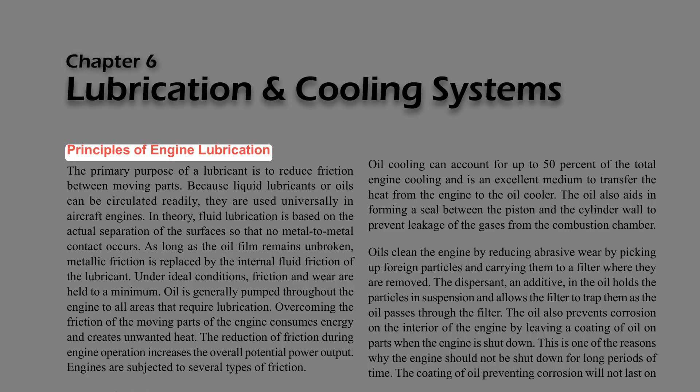Principles of engine lubrication. The primary purpose of a lubricant is to reduce friction between moving parts. Because liquid lubricants or oils can be circulated readily, they are used universally in aircraft engines. In theory, fluid lubrication is based on the actual separation of the surfaces so that no metal-to-metal contact occurs. As long as the oil film remains unbroken, metallic friction is replaced by the internal fluid friction of the lubricant. Under ideal conditions, friction and wear are held to a minimum.

Oil is generally pumped throughout the engine to all areas that require lubrication. Overcoming the friction of the moving parts of the engine consumes energy and creates unwanted heat. The reduction of friction during engine operation increases the overall potential power output. Engines are subjected to several types of friction.

Types of friction. Friction may be defined as the rubbing of one object or surface against another. One surface sliding over another surface causes sliding friction, as found in the use of plain bearings. The surfaces are not completely flat or smooth and have microscopic defects that cause friction between the two moving surfaces.

Rolling friction is created when a roller or sphere rolls over another surface, such as with ball or roller bearings, also referred to as anti-friction bearings. The amount of friction created by rolling friction is less than that created by sliding friction, and this bearing uses an outer race and an inner race with balls, or steel spheres, rolling between the moving parts or races.

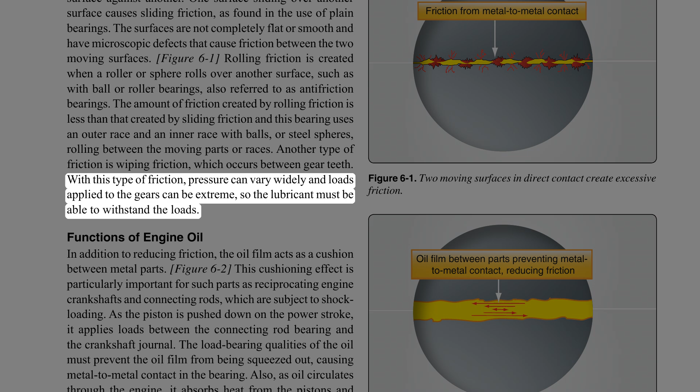Another type of friction is wiping friction, which occurs between gear teeth. With this type of friction, pressure can vary widely and loads applied to the gears can be extreme, so the lubricant must be able to withstand the loads.

Functions of engine oil. In addition to reducing friction, the oil film acts as a cushion between metal parts. This cushioning effect is particularly important for such parts as reciprocating engine crankshafts and connecting rods, which are subject to shock loading. As the piston is pushed down on the power stroke, it applies loads between the connecting rod bearing and the crankshaft journal. The load-bearing qualities of the oil must prevent the oil film from being squeezed out, causing metal-to-metal contact in the bearing.

Also, as oil circulates through the engine, it absorbs heat from the pistons and cylinder walls. In reciprocating engines, these components are especially dependent on the oil for cooling. Oil cooling can account for up to 50% of the total engine cooling and is an excellent medium to transfer the heat from the engine to the oil cooler.

The oil also aids in forming a seal between the piston and the cylinder wall to prevent leakage of the gases from the combustion chamber.

Oils clean the engine by reducing abrasive wear, picking up foreign particles and carrying them to a filter where they are removed. The dispersant, an additive in the oil, holds the particles in suspension and allows the filter to trap them as the oil passes through the filter.

The oil also prevents corrosion on the interior of the engine by leaving a coating of oil on parts when the engine is shut down. This is one of the reasons why the engine should not be shut down for long periods of time. The coating of oil preventing corrosion will not last on the parts, allowing them to rust or corrode. The engine's oil is the lifeblood of the engine, and it is very important for the engine to perform its function and to extend the length between overhauls.

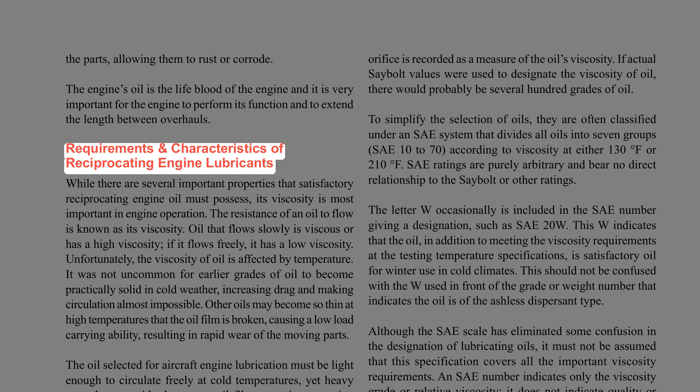Requirements and characteristics of reciprocating engine lubricants. While there are several important properties that satisfactory reciprocating engine oil must possess, its viscosity is most important in engine operation. The resistance of an oil to flow is known as its viscosity.

Oil that flows slowly is viscous or has a high viscosity. If it flows freely, it has a low viscosity. Unfortunately, the viscosity of oil is affected by temperature. It was not uncommon for earlier grades of oil to become practically solid in cold weather, increasing drag and making circulation almost impossible. Other oils may become so thin at high temperatures that the oil film is broken, causing a low load carrying ability, resulting in rapid wear of the moving parts.

The oil selected for aircraft engine lubrication must be light enough to circulate freely at cold temperatures, yet heavy enough to provide the proper oil film at engine operating temperatures. Since lubricants vary in properties and since no one oil is satisfactory for all engines and all operating conditions, it is extremely important that only the approved grade or Society of Automotive Engineers, SAE, rating be used.

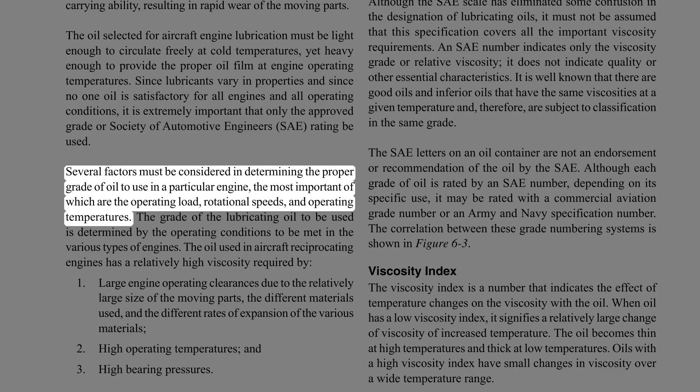Several factors must be considered in determining the proper grade of oil to use in a particular engine, the most important of which are the operating load, rotational speeds, and operating temperatures. The grade of lubricating oil is determined by the operating conditions to be met in various types of engines. The oil used in aircraft reciprocating engines has a relatively high viscosity required by large engine operating clearances, due to the relatively large size of the moving parts, the different materials used, and the different rates of expansion of the various materials.

High operating temperatures and high bearing pressures.

Viscosity. Generally, commercial aviation oils are classified by a number, such as 80, 100, 140, etc. That is an approximation of the viscosity as measured by a testing instrument called the Saybolt Universal Viscosimeter. In this instrument, a tube holds a specific quantity of the oil to be tested. The oil is brought to an exact temperature by a liquid bath surrounding the tube. The time in seconds required for exactly 60 cubic centimeters of oil to flow through an accurately calibrated orifice is recorded as a measure of the oil's viscosity.

If actual Saybolt values were used to designate the viscosity of oil, there would probably be several hundred grades of oil. To simplify the selection of oils, they are often classified under an SAE system that divides all oils into 7 groups, SAE 10 to 70, according to viscosity at either 130 degrees Fahrenheit or 210 degrees Fahrenheit. SAE ratings are purely arbitrary and bear no direct relationship to the Saybolt or other ratings.

The letter W occasionally is included in the SAE number, giving a designation such as SAE 20W. This W indicates that the oil, in addition to meeting the viscosity requirements at the testing temperature specifications, is satisfactory for winter use in cold climates. This should not be confused with the W used in front of the grade or weight number, which indicates the oil is of the ashless dispersant type.

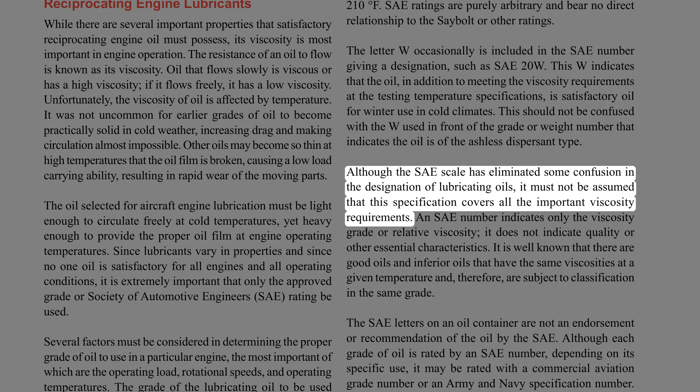Although the SAE scale has eliminated some confusion in the designation of lubricating oils, it must not be assumed that this specification covers all the important viscosity requirements. An SAE number indicates only the viscosity grade or relative viscosity; it does not indicate quality or other essential characteristics. It is well known that there are good oils and inferior oils that have the same viscosities at a given temperature, and therefore are subject to classification in the same grade.

The SAE letters on an oil container are not an endorsement or recommendation of the oil by the SAE. Although each grade of oil is rated by an SAE number, depending on its specific use, it may also be rated with a commercial aviation grade number or an Army and Navy specification number. The correlation between these grade numbering systems is shown in Figure 6-3.

Viscosity Index. The viscosity index is a number that indicates the effect of temperature changes on the viscosity of the oil. When oil has a low viscosity index, it signifies a relatively large change of viscosity with increased temperature. The oil becomes thin at high temperatures and thick at low temperatures. Oils with a high viscosity index have small changes in viscosity over a wide temperature range. The best oil for most purposes is one that maintains a constant viscosity throughout temperature changes.

Oil having a high viscosity index resists excessive thickening when the engine is subjected to cold temperatures. This allows for rapid cranking speeds during starting and prompt oil circulation during initial startup. This oil also resists excessive thinning when the engine is at operating temperature, providing full lubrication and bearing load protection.

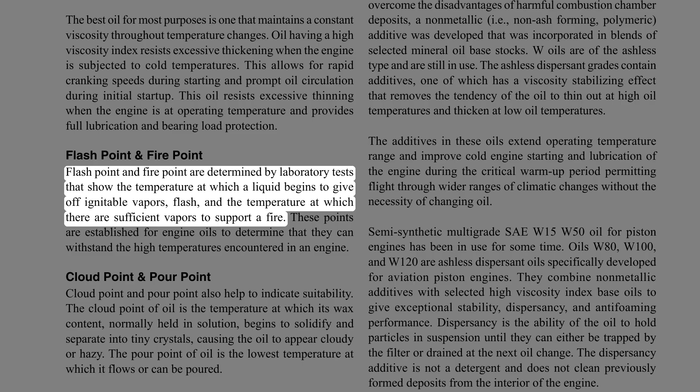Flash point and fire point. Flash point and fire point are determined by laboratory tests that show the temperature at which a liquid begins to give off ignitable vapors, flash, and the temperature at which there are sufficient vapors to support a fire. These points are established for engine oils to determine that they can withstand the high temperatures encountered in an engine.

Cloud point and pour point. Cloud point and pour point also help to indicate suitability. The cloud point of oil is the temperature at which its wax content, normally held in solution, begins to solidify and separate into tiny crystals, causing the oil to appear cloudy or hazy. The pour point of oil is the lowest temperature at which it flows or can be poured.

Specific gravity. Specific gravity is a comparison of the weight of the substance to the weight of an equal volume of distilled water at a specified temperature. As an example, water weighs approximately 8 pounds to the gallon.

Oil with a specific gravity of 0.9 would weigh 7.2 pounds to the gallon.

In the early years, the performance of aircraft piston engines was such that they could be lubricated satisfactorily by means of straight mineral oils, blended from specially selected petroleum-based stocks. Oil grades 65, 80, 100, and 120 are straight mineral oils blended from selected high viscosity index base oils.

These oils do not contain any additives except for very small amounts of pour point depressant, which helps improve fluidity at very low temperatures, and an antioxidant. This type of oil is used during the break-in period of a new aviation piston engine or those recently overhauled.

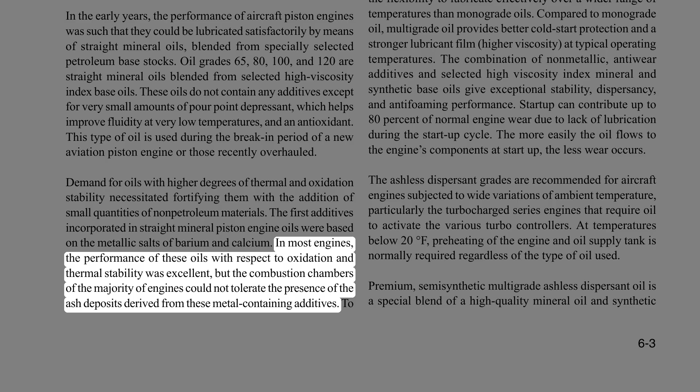Demand for oils with higher degrees of thermal and oxidation stability necessitated fortifying them with the addition of small quantities of non-petroleum materials. The first additives incorporated in straight mineral piston engine oils were based on the metallic salts of barium and calcium. In most engines, the performance of these oils with respect to oxidation and thermal stability was excellent, but the combustion chambers of the majority of engines could not tolerate the presence of the ash deposits derived from these metal-containing additives.

To overcome the disadvantages of harmful combustion chamber deposits, a non-metallic, i.e., non-ash-forming, polymeric additive was developed that was incorporated in blends of selected mineral oil-based stocks. W oils are of the ashless type and are still in use.

The ashless dispersant grades contain additives, one of which has a viscosity stabilizing effect that removes the tendency of the oil to thin out at high oil temperatures and thicken at low oil temperatures. The additives in these oils extend operating temperature range and improve cold engine starting and lubrication of the engine during the critical warm-up period, permitting flight through wider ranges of climatic changes without the necessity of changing oil.

Semi-synthetic multigrade, SAE W15 W50, oil for piston engines has been in use for some time. Oils W80, W100, and W120 are ashless dispersant oils specifically developed for aviation piston engines. They combine non-metallic additives with selected high viscosity index base oils to give exceptional stability, dispersancy, and anti-foaming performance.

Dispersancy is the ability of the oil to hold particles in suspension until they can either be trapped by the filter or drained at the next oil change. The dispersancy additive is not a detergent and does not clean previously formed deposits from the interior of the engine.

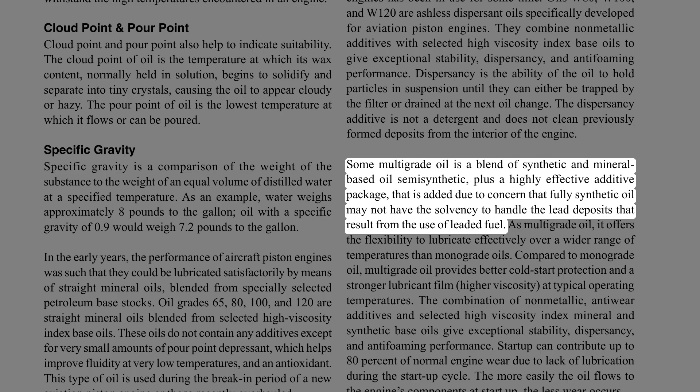Some multigrade oil is a blend of synthetic and mineral-based oil, semi-synthetic, plus a highly effective additive package, that is added due to concern that fully synthetic oil may not have the solvency to handle the lead deposits that result from the use of leaded fuel.

As a multigrade oil, it offers the flexibility to lubricate effectively over a wider range of temperatures than monograde oils. Compared to monograde oil, multigrade oil provides better cold start protection and a stronger lubricant film, higher viscosity, at typical operating temperatures. The combination of non-metallic anti-wear additives and selected high viscosity index mineral and synthetic base oils give exceptional stability, dispersancy, and anti-foaming performance.

Startup can contribute up to 80% of normal engine wear due to lack of lubrication during the startup cycle. The more easily the oil flows to the engine's components at startup, the less wear occurs.

The ashless dispersant grades are recommended for aircraft engines subjected to wide variations of ambient temperature, particularly the turbocharged series engines that require oil to activate the various turbocontrollers. At temperatures below 20 degrees Fahrenheit, preheating of the engine and oil supply tank is normally required regardless of the type of oil used.

Premium, semi-synthetic multigrade ashless dispersant oil is a special blend of a high-quality mineral oil and synthetic hydrocarbons with an advanced additive package that has been specifically formulated for multigrade applications. The ashless anti-wear additive provides exceptional wear protection for wearing surfaces.

Many aircraft manufacturers add approved preservative lubricating oil to protect new engines from rust and corrosion at the time the aircraft leaves the factory. This preservative oil should be removed at the end of the first 25 hours of operation.

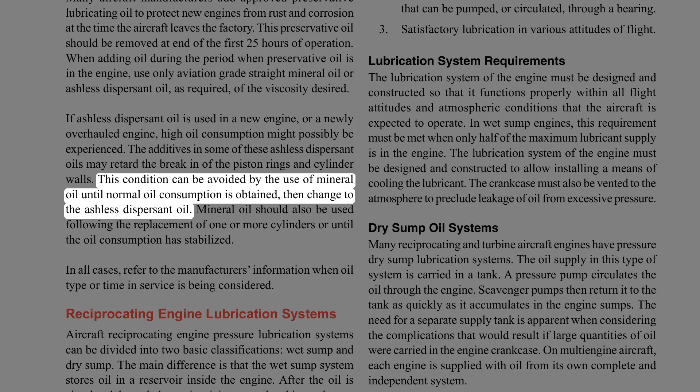Mineral oil should also be used following the replacement of one or more cylinders, or until oil consumption has stabilized. In all cases, refer to the manufacturer's information when oil type or time in service is being considered.

Reciprocating engine lubrication systems can be divided into two basic classifications: Wet-Sump and Dry-Sump. The main difference is that the Wet-Sump system stores oil in a reservoir inside the engine. After the oil is circulated through the engine, it is returned to this crankcase-based reservoir. A Dry-Sump engine pumps the oil from the engine's crankcase to an external tank that stores the oil, using a scavenge pump, some external tubing, and an external tank. Other than this difference, the systems use similar types of components. Because the Dry-Sump system contains all the components of the Wet-Sump system, it is explained as an example.

Combination splash and pressure lubrication. The lubricating oil is distributed to the various moving parts of a typical internal combustion engine by one of three methods: pressure, splash, or a combination of pressure and splash. The pressure lubrication system is the principal method of lubricating aircraft engines. Splash lubrication may be used in addition to pressure lubrication, but it is never used by itself. Aircraft engine lubrication systems are always either the pressure type or the combination pressure and splash type, usually the latter.

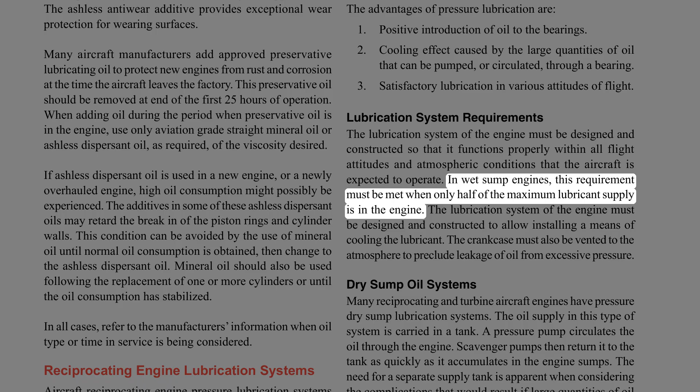Lubrication system requirements: the lubrication system of the engine must be designed and constructed so that it functions properly within all flight attitudes and atmospheric conditions the aircraft is expected to operate in. In Wet-Sump engines, this requirement must be met when only half of the maximum lubricant supply is in the engine. The lubrication system must also allow installing a means of cooling the lubricant, and the crankcase must be vented to the atmosphere to preclude leakage of oil from excessive pressure.

Dry-Sump Oil Systems. Many reciprocating and turbine aircraft engines have pressure dry-sump lubrication systems. The oil supply in this type of system is carried in a tank. A pressure pump circulates the oil through the engine, and scavenger pumps return it to the tank as quickly as it accumulates in the engine sumps. The need for a separate supply tank is apparent when considering the complications that would result if large quantities of oil were carried in the engine crankcase.

On multi-engine aircraft, each engine is supplied with oil from its own complete and independent system. Although the arrangement of oil systems in different aircraft varies widely, and the units differ in construction details, the functions of all such systems are the same. A study of one system clarifies the general operation and maintenance requirements of other systems.

The principal units in a typical reciprocating engine dry-sump oil system include an oil supply tank, an engine-driven pressure oil pump, a scavenge pump, an oil cooler with an oil cooler control valve, oil tank vent, necessary tubing, and pressure and temperature indicators.

Oil tanks. Oil tanks are generally associated with a dry-sump lubrication system, while a wet-sump system uses the crankcase of the engine to store the oil. Oil tanks are usually constructed of aluminum alloy and must withstand any vibration, inertia, and fluid loads expected in operation. Each oil tank used with a reciprocating engine must have expansion space of not less than the greater of 10% of the tank capacity or 0.5 gallons. Each filler cap of an oil tank used with an engine must provide an oil-tight seal.

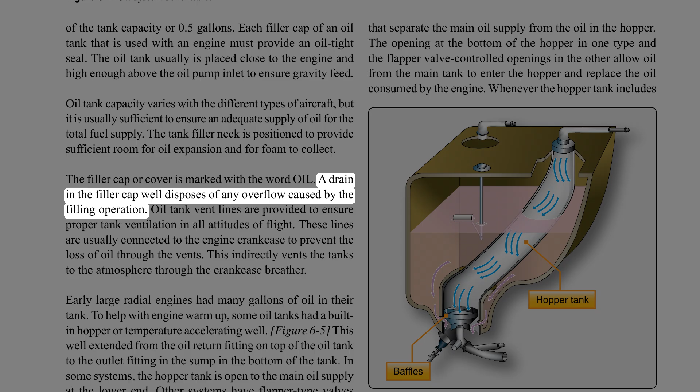The oil tank is usually placed close to the engine and high enough above the oil pump inlet to ensure gravity feed. Oil tank capacity varies with different types of aircraft, but is usually sufficient to ensure an adequate supply of oil for the total fuel supply. The tank filler neck is positioned to provide sufficient room for oil expansion and for foam to collect. The filler cap or cover is marked with the word oil. A drain in the filler cap well disposes of any overflow caused by the filling operation.

Oil tank vent lines are provided to ensure proper tank ventilation in all attitudes of flight. These lines are usually connected to the engine crankcase to prevent the loss of oil through the vents. This indirectly vents the tanks to the atmosphere through the crankcase breather.

Early large radial engines had many gallons of oil in their tank. To help with engine warm-up, some oil tanks had a built-in hopper or temperature accelerating well. This well extended from the oil return fitting on top of the oil tank to the outlet fitting in the sump in the bottom of the tank.

In some systems, the hopper tank is open to the main oil supply at the lower end. Other systems have flapper-type valves that separate the main oil supply from the oil in the hopper. The opening at the bottom of the hopper in one type, and the flapper valve-controlled openings in the other, allow oil from the main tank to enter the hopper and replace the oil consumed by the engine. Whenever the hopper tank includes the flapper-controlled openings, the valves are operated by differential oil pressure.

By separating the circulating oil from the surrounding oil in the tank, less oil is circulated. This hastens the warming of the oil when the engine was started. Very few of these types of tanks are still in use, and most are associated with radial engine installations.

Generally, the return line in the top of the tank is positioned to discharge the returned oil against the wall of the tank in a swirling motion. This method considerably reduces foaming that occurs when oil mixes with air. Baffles in the bottom of the oil tank break up this swirling action to prevent air from being drawn into the inlet line of the oil pressure pump. Foaming oil increases in volume and reduces its ability to provide proper lubrication.

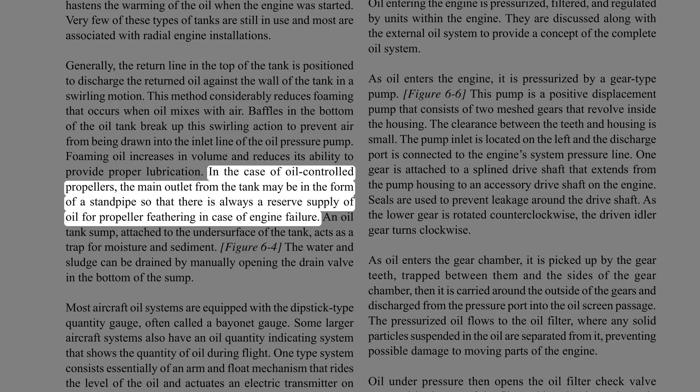In the case of oil-controlled propellers, the main outlet from the tank may be in the form of a standpipe, so that there is always a reserve supply of oil for propeller feathering in case of engine failure.

An oil tank sump, attached to the undersurface of the tank, acts as a trap for moisture and sediment. The water and sludge can be drained by manually opening the drain valve in the bottom of the sump.

Most aircraft oil systems are equipped with the dipstick-type quantity gauge, often called a bayonet gauge. Some larger aircraft systems also have an oil quantity indicating system that shows the quantity of oil during flight. One type of system consists essentially of an arm and float mechanism that rides the level of the oil and actuates an electric transmitter on top of the tank. The transmitter is connected to a flight deck gauge that indicates the quantity of oil.

Oil pump. Oil entering the engine is pressurized, filtered, and regulated by units within the engine. They are discussed along with the external oil system to provide a concept of the complete oil system.

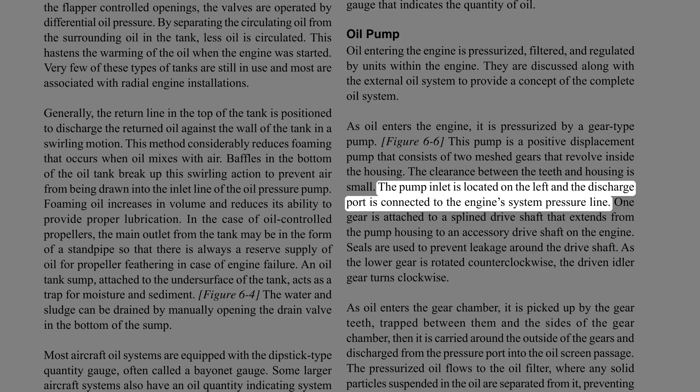As oil enters the engine, it is pressurized by a gear-type pump. This pump is a positive displacement pump that consists of two meshed gears that revolve inside the housing. The clearance between the teeth and housing is small. The pump inlet is located on the left, and the discharge port is connected to the engine's system pressure line. One gear is attached to a splined drive shaft that extends from the pump housing to an accessory drive shaft on the engine. Seals are used to prevent leakage around the drive shaft.

As the lower gear is rotated counterclockwise, the driven idler gear turns clockwise. As oil enters the gear chamber, it is picked up by the gear teeth, trapped between them and the sides of the gear chamber. Then it is carried around the outside of the gears and discharged from the pressure port into the oil screen passage.

The pressurized oil flows to the oil filter, where any solid particles suspended in the oil are separated from it, preventing possible damage to moving parts of the engine.

Oil under pressure then opens the oil filter check valve mounted in the top of the filter. This valve is used mostly with dry-sump radial engines and is closed by a light spring loading of 1 to 3 pounds per square inch, psi, when the engine is not operating, to prevent gravity-fed oil from entering the engine and settling in the lower cylinders or sump area of the engine.

If oil were allowed to gradually seep by the rings of the piston and fill the combustion chamber, it could cause a liquid lock. This could happen if the valves on the cylinder were both closed and the engine was cranked for start. Damage could occur to the engine.

The oil filter bypass valve, located between the pressure side of the oil pump and the oil filter, permits unfiltered oil to bypass the filter and enter the engine if the oil filter is clogged, or during cold weather if congealed oil is blocking the filter during engine start.

The spring loading on the bypass valve allows the valve to open before the oil pressure collapses the filter. In the case of cold, congealed oil, it provides a low resistance path around the filter. Dirty oil in an engine is better than no lubrication.

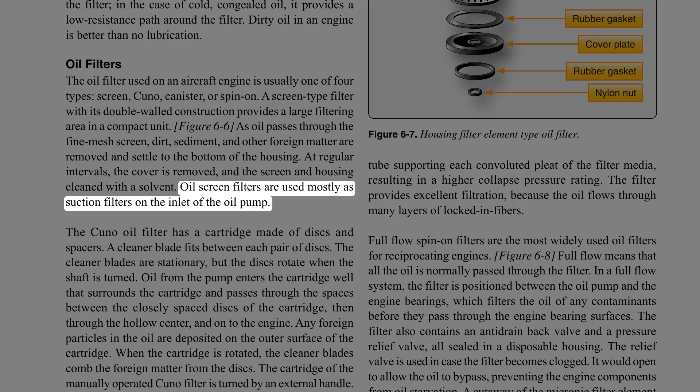The Cuno oil filter has a cartridge made of discs and spacers. A cleaner blade fits between each pair of discs. The cleaner blades are stationary, but the discs rotate when the shaft is turned. Oil from the pump enters the cartridge well that surrounds the cartridge and passes through the spaces between the closely spaced discs, then through the hollow center, and onto the engine. Any foreign particles in the oil are deposited on the outer surface of the cartridge. When the cartridge is rotated, the cleaner blades comb the foreign matter from the discs.

The cartridge of the manually operated Cuno filter is turned by an external handle. Automatic Cuno filters have a hydraulic motor built into the filter head. This motor, operated by engine oil pressure, rotates the cartridge whenever the engine is running. There is a manual turning nut on the automatic Cuno filter for rotating the cartridge manually during inspections. This filter is not often used on modern aircraft.

A canister housing filter has a replaceable filter element; the rest of the components, other than seals and gaskets, are reused. The filter element is designed with a corrugated, strong steel center tube supporting each convoluted pleat of the filter media, resulting in a higher collapse pressure rating. The filter provides excellent filtration because the oil flows through many layers of locked-in fibers.

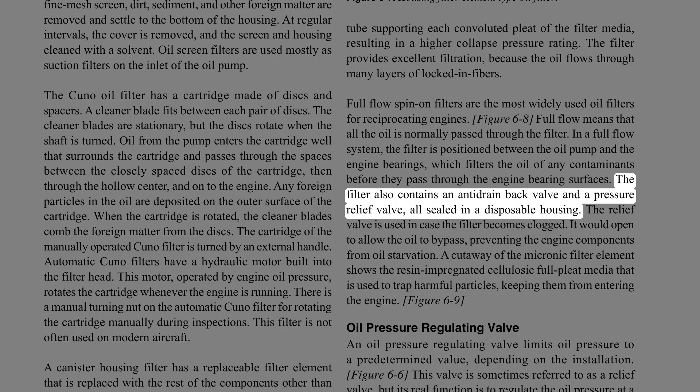Full-flow spin-on filters are the most widely used oil filters for reciprocating engines. Full flow means that all the oil is normally passed through the filter. In a full flow system, the filter is positioned between the oil pump and the engine bearings, which filters the oil of any contaminants before they pass through the engine bearing surfaces. The filter also contains an anti-drain back valve and a pressure relief valve, all sealed in a disposable housing.

The relief valve is used in case the filter becomes clogged. It would open to allow the oil to bypass, preventing the engine components from oil starvation. A cutaway of the micronic filter element shows the resin-impregnated cellulosic full-pleat media that is used to trap harmful particles, keeping them from entering the engine.

Oil pressure regulating valve: an oil pressure regulating valve limits oil pressure to a predetermined value, depending on the installation. This valve is sometimes referred to as a relief valve, but its real function is to regulate the oil pressure at a preset pressure level. The oil pressure must be sufficiently high to ensure adequate lubrication of the engine and its accessories at high speeds and powers. This pressure helps ensure that the oil film between the crankshaft journal and bearing is maintained.

However, the pressure must not be too high, as leakage and damage to the oil system may result. The oil pressure is generally adjusted by loosening the lock nut and turning the adjusting screw. On most aircraft engines, turning the screw clockwise increases the tension of the spring that holds the relief valve on its seat and increases the oil pressure. Turning the adjusting screw counterclockwise decreases the spring tension and lowers the pressure.

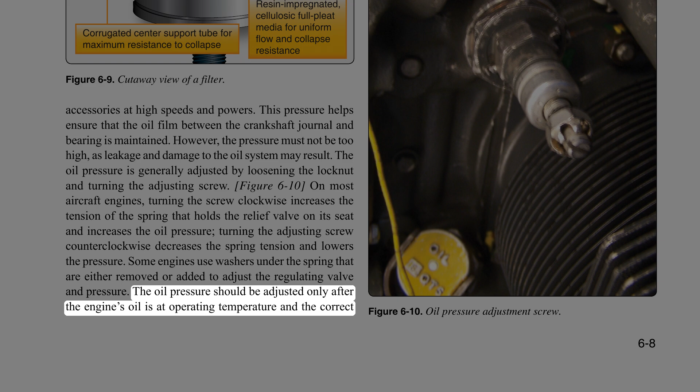Some engines use washers under the spring that are either removed or added to adjust the regulating valve and pressure. The oil pressure should be adjusted only after the engine's oil is at operating temperature and the correct viscosity is verified. The exact procedure for adjusting the oil pressure and the factors that vary in oil pressure setting are included in applicable manufacturer's instructions.

Oil pressure gauge: usually, the oil pressure gauge indicates the pressure that oil enters the engine from the pump. This gauge warns of possible engine failure caused by an exhausted oil supply, failure of the oil pump, burned out bearings, ruptured oil lines, or other causes that may be indicated by a loss of oil pressure.

One type of oil pressure gauge uses a Bourdon tube mechanism that measures the difference between oil pressure and cabin, or atmospheric, pressure. This gauge is constructed similarly to other Bourdon-type gauges, except that it has a small restriction built into the instrument case, or into the nipple connection leading to the Bourdon tube. This restriction prevents the surging action of the oil pump from damaging the gauge or causing the pointer to oscillate too violently with each pressure pulsation.

The oil pressure gauge has a scale ranging from 0 to 200 psi, or from 0 to 300 psi. Operation range markings are placed on the cover glass, or the face of the gauge, to indicate the safe range of oil pressure for a given installation.

A dual-type oil pressure gauge is available for use on multi-engine aircraft. The dual indicator contains two Bourdon tubes, housed in a standard instrument case, one tube being used for each engine. The connections extend from the back of the case to each engine. There is one common movement assembly, but the moving parts function independently.

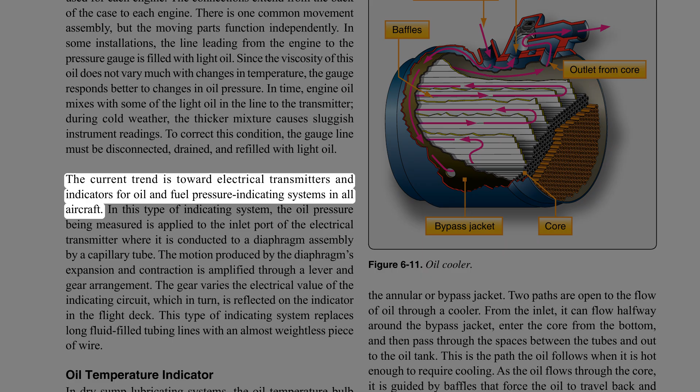The current trend is toward electrical transmitters and indicators for oil and fuel pressure indicating systems in all aircraft. In this type of indicating system, the oil pressure being measured is applied to the inlet port of the electrical transmitter where it is conducted to a diaphragm assembly by a capillary tube. The motion produced by the diaphragm's expansion and contraction is amplified through a lever and gear arrangement. The gear varies the electrical value of the indicating circuit, which in turn is reflected on the indicator in the flight deck. This type of indicating system replaces long fluid-filled tubing lines with an almost weightless piece of wire.

Oil temperature indicator. In dry-sump lubricating systems, the oil temperature bulb may be anywhere in the oil inlet line between the supply tank and the engine. Oil systems for wet-sump engines have the temperature bulb located where it senses oil temperature after the oil passes through the oil cooler. In either system, the bulb is located so that it measures the temperature of the oil before it enters the engine's hot sections.

An oil temperature gauge in the flight deck is connected to the oil temperature bulb by electrical leads. The oil temperature is indicated on the gauge. Any malfunction of the oil cooling system appears as an abnormal reading.

Oil cooler. The cooler, either cylindrical or elliptical shaped, consists of a core enclosed in a double-walled shell. The core is built of copper or aluminum tubes with the tube ends formed to a hexagonal shape and joined together in the honeycomb effect. The ends of the copper tubes of the core are soldered, whereas aluminum tubes are brazed or mechanically joined. The tubes touch only at the ends so that a space exists between them along most of their lengths.

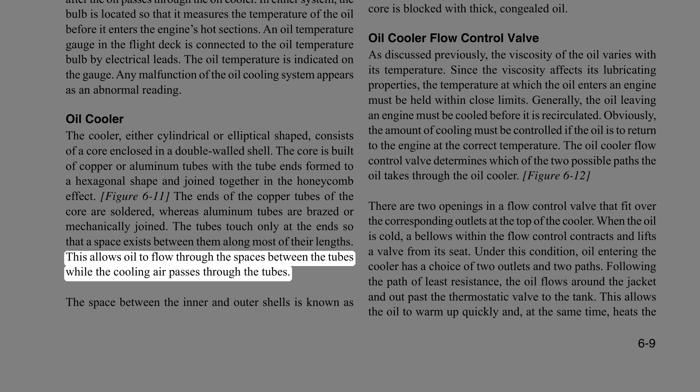This allows oil to flow through the spaces between the tubes while the cooling air passes through the tubes. The space between the inner and outer shells is known as the annular or bypass jacket. Two paths are open to the flow of oil through a cooler. From the inlet, it can flow halfway around the bypass jacket, enter the core from the bottom, and then pass through the spaces between the tubes and out to the oil tank.

This is the path the oil follows when it is hot enough to require cooling. As the oil flows through the core, it is guided by baffles that force the oil to travel back and forth several times before it reaches the core outlet.

The oil can also pass from the inlet completely around the bypass jacket to the outlet without passing through the core. Oil follows this bypass route when the oil is cold or when the core is blocked with thick, congealed oil. Oil cooler flow control valve.

As discussed previously, the viscosity of the oil varies with its temperature. Since the viscosity affects its lubricating properties, the temperature at which the oil enters an engine must be held within close limits. Generally, the oil leaving an engine must be cooled before it is recirculated.

Obviously, the amount of cooling must be controlled if the oil is to return to the engine at the correct temperature. The oil cooler flow control valve determines which of the two possible paths the oil takes through the oil cooler. There are two openings in a flow control valve that fit over the corresponding outlets at the top of the cooler.

When the oil is cold, a bellows within the flow control contracts and lifts a valve from its seat. Under this condition, oil entering the cooler has a choice of two outlets and two paths. Following the path of least resistance, the oil flows around the jacket and out past the thermostatic valve to the tank. This allows the oil to warm up quickly and, at the same time, heats the oil in the core.

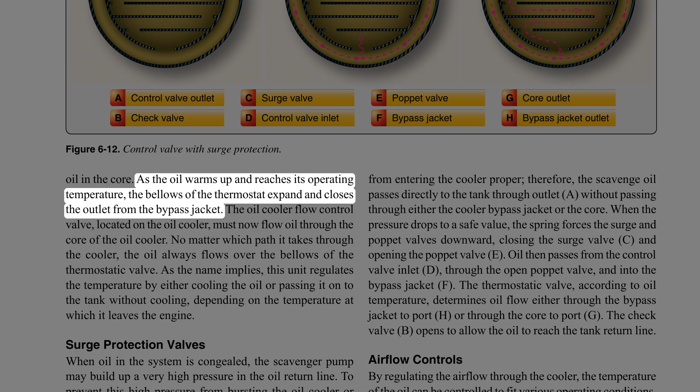As the oil warms up and reaches its operating temperature, the bellows of the thermostat expand and close the outlet from the bypass jacket. The oil cooler flow control valve, located on the oil cooler, must now flow oil through the core of the oil cooler.

No matter which path it takes through the cooler, the oil always flows over the bellows of the thermostatic valve. As the name implies, this unit regulates the temperature by either cooling the oil or passing it onto the tank without cooling, depending on the temperature at which it leaves the engine.

Surge protection valves. When oil in the system is congealed, the scavenge pump may build up a very high pressure in the oil return line. To prevent this high pressure from bursting the oil cooler or blowing off the hose connections, some aircraft have surge protection valves in the engine lubrication systems.

One type of surge valve is incorporated in the oil cooler flow control valve. Another type is a separate unit in the oil return line. The surge protection valve incorporated in a flow control valve is the more common type.

Although this flow control valve differs from the one just described, it is essentially the same except for the surge protection feature. The high-pressure operation condition is shown in Figure 6-12, in which the high oil pressure at the control valve inlet has forced the surge valve, C, upward. Note how this movement has opened the surge valve and, at the same time, seated the poppet valve, E.

The closed poppet valve prevents oil from entering the cooler proper, therefore, the scavenge oil passes directly to the tank through outlet, A, without passing through either the cooler bypass jacket or the core.

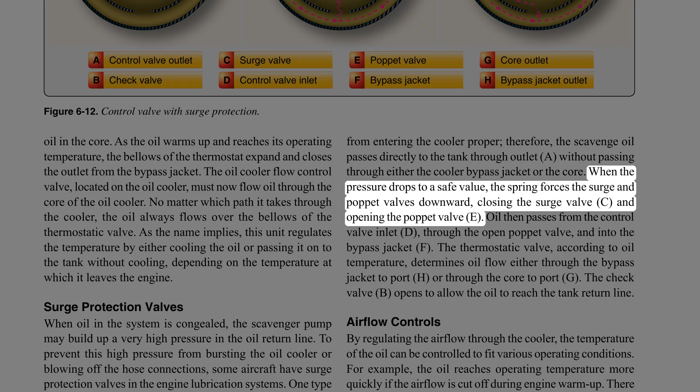When the pressure drops to a safe value, the spring forces the surge and poppet valves downward, closing the surge valve, C, and opening the poppet valve, E. Oil then passes from the control valve inlet, D, through the open poppet valve, and into the bypass jacket, F.

The thermostatic valve, according to oil temperature, determines oil flow either through the bypass jacket to port, H, or through the core to port, G. The check valve, B, opens to allow the oil to reach the tank return line.

Airflow controls. By regulating the airflow through the cooler, the temperature of the oil can be controlled to fit various operating conditions. For example, the oil reaches operating temperature more quickly if the airflow is cut off during engine warm-up.

There are two methods in general use: shutters installed on the rear of the oil cooler, and a flap on the air exit duct. In some cases, the oil cooler air exit flap is opened manually and closed by a linkage attached to a flight deck lever. More often, the flap is opened and closed by an electric motor.

One of the most widely used automatic oil temperature control devices is the floating control thermostat that provides manual and automatic control of the oil inlet temperatures.

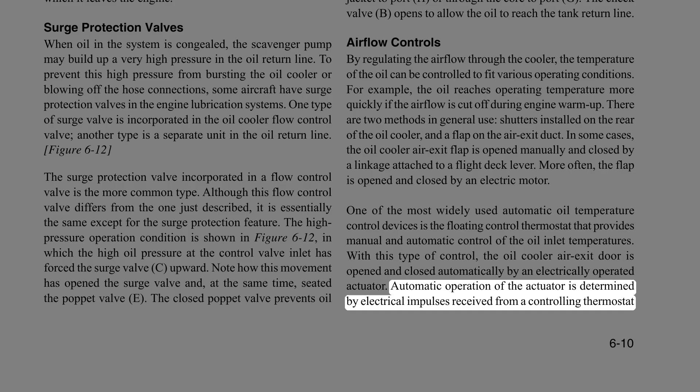With this type of control, the oil cooler air exit door is opened and closed automatically by an electrically operated actuator. Automatic operation of the actuator is determined by electrical impulses received from a controlling thermostat, inserted in the oil pipe leading from the oil cooler to the oil supply tank. The actuator may be operated manually by an oil cooler air exit door control switch.

Placing this switch in the open or closed position produces a corresponding movement of the cooler door. Placing the switch in the auto position puts the actuator under the automatic control of the floating control thermostat.

The thermostat shown in figure 6-13 is adjusted to maintain a normal oil temperature so that it does not vary more than approximately 5 to 8 degrees Celsius, depending on the installation. During operation, the temperature of the engine oil flowing over the bimetal element causes it to wind or unwind slightly.

Figure 6-13b: this movement rotates the shaft, A, and the grounded center contact arm, C. As the grounded contact arm is rotated, it is moved toward either the open or closed floating contact arm, G. The two floating contact arms are oscillated by the cam, F, which is continuously rotated by an electric motor, D, through a gear train, E.

When the grounded center contact arm is positioned by the bimetal element so that it touches one of the floating contact arms, an electric circuit to the oil cooler exit flap actuator motor is completed, causing the actuator to operate and position the oil cooler air exit flap.

Newer systems use electronic control systems, but the function or overall operation is basically the same regarding control of the oil temperature through control of the airflow through the cooler. In some lubrication systems, dual oil coolers are used.

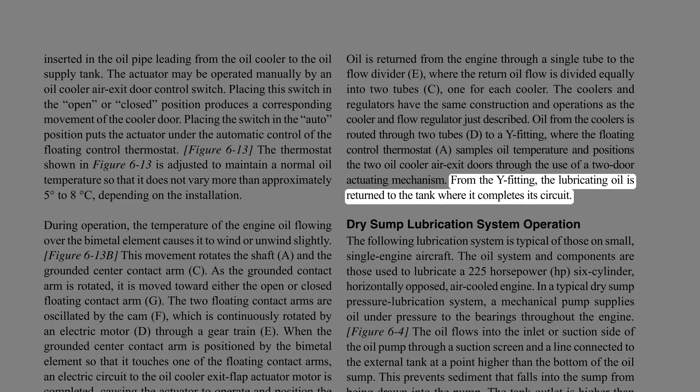Oil from the coolers is routed through two tubes, D, to a Y fitting, where the floating control thermostat, A, samples oil temperature and positions the two oil cooler air exit doors through the use of a two-door actuating mechanism. From the Y fitting, the lubricating oil is returned to the tank where it completes its circuit.

Dry-sump lubrication system operation. The following lubrication system is typical of those on small, single-engine aircraft. The oil system and components are those used to lubricate a 225 horsepower, 6-cylinder, horizontally opposed, air-cooled engine.

In a typical dry-sump pressure lubrication system, a mechanical pump supplies oil under pressure to the bearings throughout the engine. The oil flows into the inlet or suction side of the oil pump through a suction screen and a line connected to the external tank at a point higher than the bottom of the oil sump.

This prevents sediment that falls into the sump from being drawn into the pump. The tank outlet is higher than the pump inlet, so gravity can assist the flow into the pump. The engine-driven, positive displacement, gear-type pump forces the oil into the full flow filter.

The oil either passes through the filter under normal conditions, or if the filter were to become clogged, the filter bypass valve would open as mentioned earlier. In the bypass position, the oil would not be filtered.

As seen in figure 6-6, the regulating relief valve senses when system pressure is reached and opens enough to bypass oil to the inlet side of the oil pump. Then the oil flows into a manifold that distributes the oil through drilled passages to the crankshaft bearings and other bearings throughout the engine.

Oil flows from the main bearings through holes drilled in the crankshaft to the lower connecting rod bearings. Oil reaches a hollow camshaft, in an inline or opposed engine, or a cam plate or cam drum in a radial engine, through a connection with the end bearing or the main oil manifold.

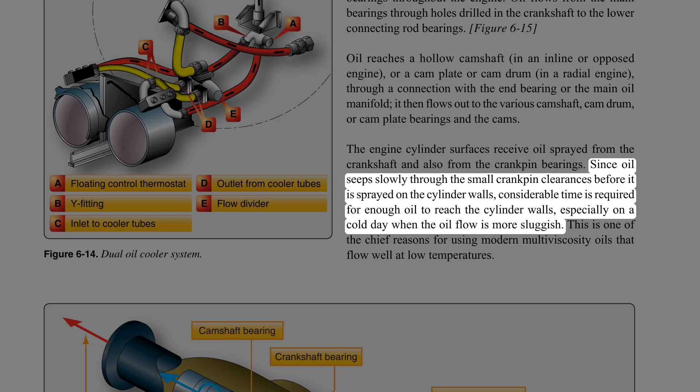Since oil seeps slowly through the small crankpin clearances before it is sprayed on the cylinder walls, considerable time is required for enough oil to reach the cylinder walls, especially on a cold day when the oil flow is more sluggish. This is one of the chief reasons for using modern multi-viscosity oils that flow well at low temperatures.

When the circulating oil has performed its function of lubricating and cooling the moving parts of the engine, it drains into the sumps in the lowest parts of the engine. Oil collected in these sumps is picked up by gear or gerotor-type scavenger pumps as quickly as it accumulates.

These pumps have a greater capacity than the pressure pump. This is needed because the volume of the oil has generally increased due to foaming, mixing with air. On dry-sump engines, this oil leaves the engine, passes through the oil cooler, and returns to the supply tank.

A thermostat attached to the oil cooler controls oil temperature by allowing part of the oil to flow through the cooler and part to flow directly into the oil supply tank.

This arrangement allows hot engine oil with a temperature still below 65 degrees Celsius, 150 degrees Fahrenheit, to mix with the cold uncirculated oil in the tank. This raises the complete engine oil supply to operating temperature in a shorter period of time.

Wet-sump lubrication system operation. A simple form of a wet-sump system is shown in Figure 6-16. The system consists of a sump or pan in which the oil supply is contained. The oil supply is limited by the sump's capacity. The level of oil is indicated or measured by a vertical rod that protrudes into the oil from an elevated hole on top of the crankcase. In the bottom of the sump is a screen strainer having a suitable mesh, or series of openings, to strain undesirable particles from the oil and yet pass sufficient quantity to the inlet or suction side of the oil pressure pump.

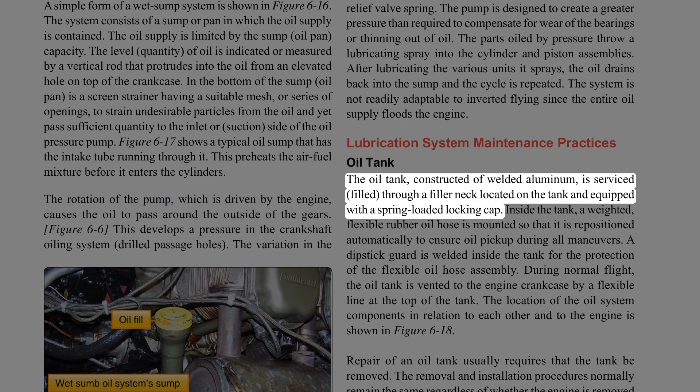Lubrication system maintenance practices: oil tank. The oil tank, constructed of welded aluminum, is serviced and filled through a filler neck located on the tank and equipped with a spring-loaded locking cap. Inside the tank, a weighted, flexible rubber oil hose is mounted so that it repositions automatically to ensure oil pickup during all maneuvers. A dipstick guard is welded inside the tank for the protection of the flexible oil hose assembly. During normal flight, the oil tank is vented to the engine crankcase by a flexible line at the top of the tank. The location of the oil system components in relation to each other and to the engine is shown in Figure 6-18.

Repair of an oil tank usually requires that the tank be removed. The removal and installation procedures normally remain the same regardless of whether the engine is removed or not. First, the oil must be drained. Most light aircraft provide an oil drain similar to that shown in Figure 6-19. On some aircraft, the normal ground attitude may prevent the oil tank from draining completely. If the amount of undrained oil is excessive, the aft portion of the tank can be raised slightly after the tank straps have been loosened to complete the drainage. After disconnecting the oil inlet and vent lines, the scupper drain hose and bonding wire can be removed. The securing straps fitted around the tank can now be removed. Any safety wire securing the clamp must be removed before the clamp can be loosened and the strap disconnected. The tank can now be lifted out of the aircraft.

The tank is reinstalled by reversing the sequence used in the tank removal. After installation, the oil tank should be filled to capacity. The engine should then be run for at least 2 minutes. Then the oil level should be checked and, if necessary, sufficient oil should be added to bring the oil up to the proper level on the dipstick.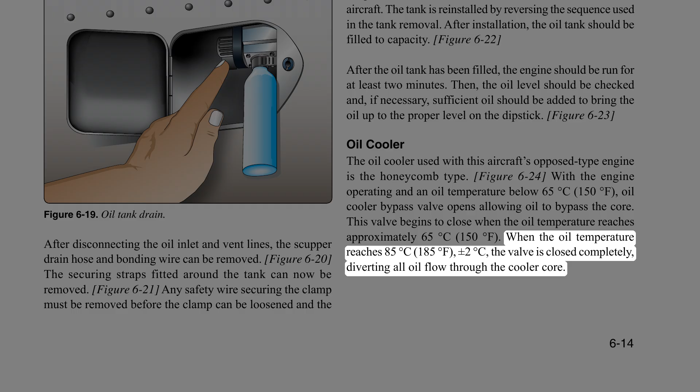Oil cooler. The oil cooler used with this aircraft's opposed type engine is the honeycomb type. With the engine operating and an oil temperature below 65 degrees Celsius, 150 degrees Fahrenheit, the oil cooler bypass valve opens, allowing oil to bypass the core. This valve begins to close when the oil temperature reaches approximately 65 degrees Celsius, 150 degrees Fahrenheit. When the oil temperature reaches 85 degrees Celsius, 185 degrees Fahrenheit, plus or minus 2 degrees Celsius, the valve is closed completely, diverting all oil flow through the cooler core.

Oil temperature bulbs.

Most oil temperature bulbs are mounted in the pressure oil screen housing. They relay an indication of engine oil inlet temperature to the oil temperature indicators mounted on the instrument panel. Temperature bulbs can be replaced by removing the safety wire and disconnecting the wire leads from the temperature bulbs, then removing the temperature bulbs using the proper wrench.

Pressure and scavenge oil screens. Sludge accumulates on the pressure and scavenge oil screens during engine operation. These screens must be removed, inspected, and cleaned at the intervals specified by the manufacturer. Typical removal procedures include removing the safety devices and loosening the oil screen housing or cover plate.

A suitable container should be provided to collect the oil that drains from the filter housing or cavity. The container must be clean so that the oil collected in it can be examined for foreign particles. Any contamination already present in the container gives a false indication of the engine condition. This could result in a premature engine removal.

After the screens are removed, they should be inspected for contamination and for the presence of metal particles that may indicate possible engine internal wear, damage, or in extreme cases, engine failure. The screen must be cleaned prior to reinstalling in the engine. In some cases, it is necessary to disassemble the filter for inspection and cleaning. The manufacturer's procedures should be followed when disassembling and reassembling an oil screen assembly.

When reinstalling a filter or screen, use new O-rings and gaskets and tighten the filter housing or cover retaining nuts to the torque value specified in the applicable maintenance manual. Filters should be safetied as required.

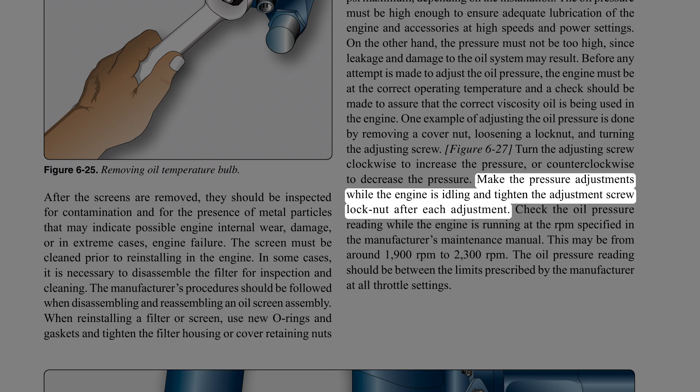One example of adjusting the oil pressure is done by removing a cover nut, loosening a lock nut, and turning the adjusting screw. Turn the adjusting screw clockwise to increase the pressure, or counterclockwise to decrease the pressure. Make the pressure adjustments while the engine is idling and tighten the adjustment screw lock nut after each adjustment.

Check the oil pressure reading while the engine is running at the RPM specified in the manufacturer's maintenance manual. This may be from around 1,900 revolutions per minute to 2,300 revolutions per minute. The oil pressure reading should be between the limits prescribed by the manufacturer at all throttle settings.

Recommendations for changing oil. Draining oil. Oil, in service, is constantly exposed to many harmful substances that reduce its ability to protect moving parts. The main contaminants are gasoline, moisture, acids, dirt, carbon, and metallic particles. Because of the accumulation of these harmful substances, common practice is to drain the entire lubrication system at regular intervals and refill with new oil.

The time between oil changes varies with each make and model aircraft and engine combination. In engines that have been operating on straight mineral oil for several hundred hours, a change to ashless dispersant oil should be made with a degree of caution as the cleaning action of some ashless dispersant oils tends to loosen sludge deposits and cause plugged oil passages.

When an engine has been operating on straight mineral oil and is known to be in excessively dirty condition, the switch to ashless dispersant oil should be deferred until after the engine is overhauled. When changing from straight mineral oil to ashless dispersant oil, the following precautionary steps should be taken.

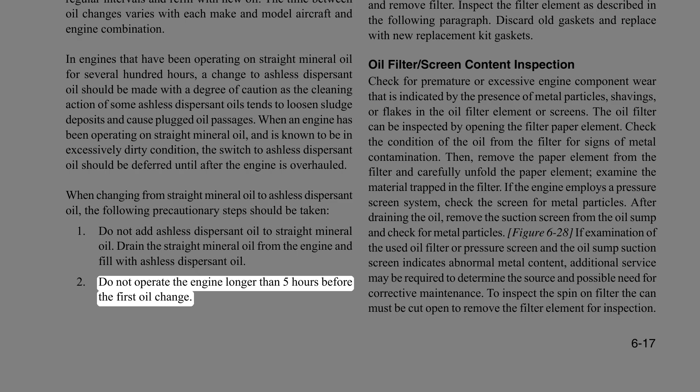Do not add ashless dispersant oil to straight mineral oil. Drain the straight mineral oil from the engine and fill with ashless dispersant oil. Do not operate the engine longer than 5 hours before the first oil change. Check all oil filters and screens for evidence of sludge or plugging. Change oil every 10 hours if sludge conditions are evident. Repeat 10-hour checks until clean screen is noted, then change oil at recommended time intervals.

All turbocharged engines must be broken in and operated with ashless dispersant oil. Oil and filter change and screen cleaning.

One manufacturer recommends that for new, remanufactured, or newly overhauled engines and for engines with any newly installed cylinders, the oil should be changed after the first 25 hours, with filter replacement or pressure screen cleaning. A typical interval is 25 hours for oil change, pressure screen cleaning, and oil sump suction screen check for engines employing a pressure screen system. Typical 50-hour interval oil changes generally include oil filter replacement and suction screen check for engines using full flow filtration systems. A maximum of 4 months between servicing is also recommended.

Oil filter removal, canister type housing: remove the filter housing from the engine by removing the safety wire and loosening the hex head screw, then turning the housing counterclockwise to remove the filter from the engine. Remove the nylon nut that holds the cover plate on the engine side of the filter, then remove the cover plate and hex head screw from the housing.

To remove the spin-on type of filter, cut the safety wire and use the wrench pad on the rear of the filter to turn it counterclockwise and remove it. Inspect the filter element as described in the following paragraph. Discard old gaskets and replace with new replacement kit gaskets.

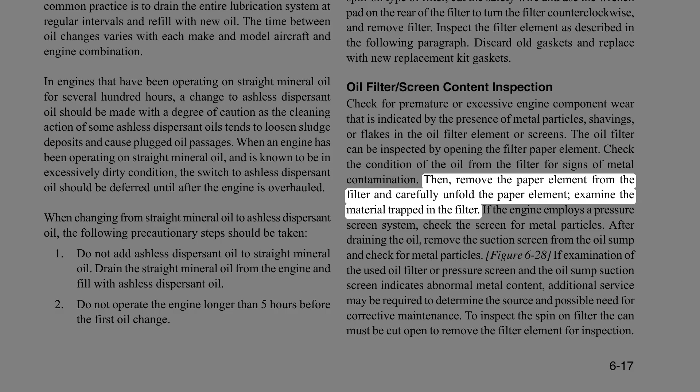If the engine employs a pressure screen system, check the screen for metal particles. After draining the oil, remove the suction screen from the oil sump and check for metal particles. If examination of the used oil filter, pressure screen, or oil sump suction screen indicates abnormal metal content, additional service may be required to determine the source and possible need for corrective maintenance.

To inspect the spin-on filter, the can must be cut open to remove the filter element for inspection. Using the special filter cutting tool, slightly tighten the cutter blade against the filter and rotate 360 degrees until the mounting plate separates from the can. Using a clean plastic bucket containing Varsol, move the filter to remove contaminants. Use a clean magnet and check for any ferrous metal particles in the filter or Varsol solution. Then take the remaining Varsol and pour it through a clean filter or shop towel. Using a bright light, inspect for any non-ferrous metals.

Assembly and installation of oil filters: after cleaning the parts, installation of the canister or filter element type filter is accomplished by lightly oiling the new rubber gaskets and installing a new copper gasket on the hex head screw. Assemble the hex head screw into the filter case using the new copper gasket. Install the filter element, place the cover over the case, then manually thread on the nylon nut by hand. Install the housing on the engine by turning it clockwise, then torque and safety it.

Spin-on filters generally have installation instructions printed on the filter. Place a coating of engine oil on the rubber gasket, install the filter, then torque and safety it. Always follow the manufacturer's current instructions to perform any maintenance.

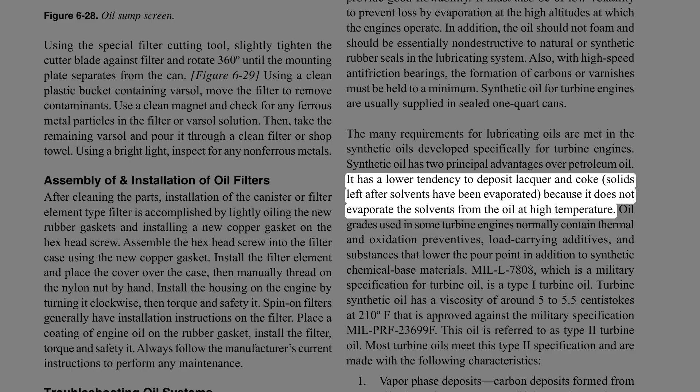Synthetic oil has two principal advantages over petroleum oil. It has a lower tendency to deposit lacquer and coke, solids left after solvents have been evaporated, because it does not evaporate the solvents from the oil at high temperature. Oil grades used in some turbine engines normally contain thermal and oxidation preventatives, load-carrying additives, and substances that lower the pour point in addition to synthetic chemical base materials.

MIL L7808, which is a military specification for turbine oil, is a Type 1 turbine oil. Turbine synthetic oil has a viscosity of around 5 to 5.5 centistokes at 210 F that is approved against the military specification MIL PRF 23699F. This oil is referred to as Type 2 turbine oil. Most turbine oils meet this Type 2 specification and are made with the following characteristics.

Vapor phase deposits: carbon deposits formed from oil mist and vapor contact with hot engine surfaces. Load carrying ability: provides for heavy loads on the bearing systems of turbine engines. Cleanliness: minimum formation of sludge deposits during severe operation. Bulk stability: resistance to physical or chemical change resulting from oxidation, permitting long periods of service operation without significant increase in viscosity or total acidity, the main indicators of oxidation.

Compatibility: most turbine oil is compatible with other oils that meet the same military specification. But most engine manufacturers do not recommend the indiscriminate mixing of approved oil brands; this is not a generally accepted practice. Seal wear: essential for the life of engines with carbon seals, that lubricant properties prevent wear of the carbon at the carbon seal face. Turbine oil health and safety precautions.

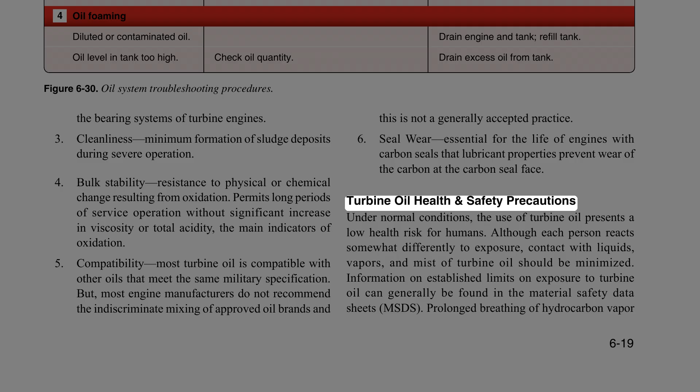Under normal conditions, the use of turbine oil presents a low health risk for humans. Although each person reacts somewhat differently to exposure, contact with liquids, vapors, and mist of turbine oil should be minimized. Information on established limits on exposure to turbine oil can generally be found in the Material Safety Data Sheets, MSDS. Prolonged breathing of hydrocarbon vapor concentrations in excess of the prescribed limits may result in lightheadedness, dizziness, and nausea.

If turbine oil is ingested, call a doctor immediately. Identify the product and how much was ingested. Because of the risk of ingestion, petroleum products should never be siphoned by mouth. Prolonged or repeated contact of turbine oil with the skin can cause irritation and dermatitis. In case of skin contact, wash the skin thoroughly with soap and warm water. Promptly remove oil-soaked clothing and wash.

If turbine oil contacts the eyes, flush the eyes with fresh water until the irritation subsides. Protective clothing, gloves, and eye protection should be used when handling turbine oil. During operation, it is possible for the oil to be subjected to very high temperatures that can break it down and produce a product of unknown toxicity. If this happens, all precautions to avoid explosives should be taken. It can also have a tendency to blister, discolor, or remove paint whenever it is spilled. Painted surfaces should be wiped clean with a petroleum solvent after spillage.

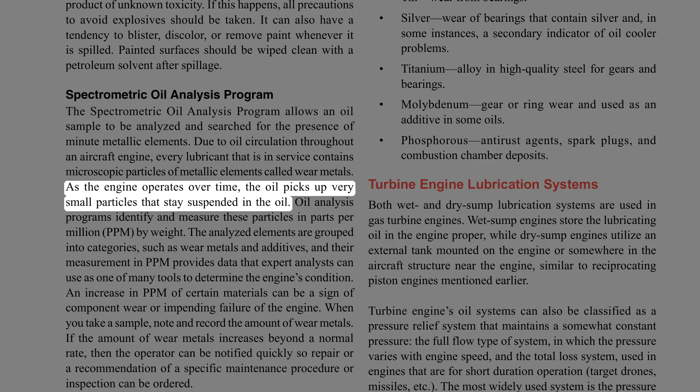Spectrometric Oil Analysis Program. The Spectrometric Oil Analysis Program allows an oil sample to be analyzed and searched for the presence of minute metallic elements. Due to oil circulation throughout an aircraft engine, every lubricant that is in service contains microscopic particles of metallic elements called wear metals. As the engine operates over time, the oil picks up very small particles that stay suspended in the oil. Oil analysis programs identify and measure these particles in parts per million, ppm, by weight.

The analyzed elements are grouped into categories, such as wear metals and additives, and their measurement in ppm provides data that expert analysts can use as one of many tools to determine the engine's condition. An increase in ppm of certain materials can be a sign of component wear or impending failure of the engine. When you take a sample, note and record the amount of wear metals. If the amount of wear metals increases beyond a normal rate, then the operator can be notified quickly so repair or recommendation of a specific maintenance procedure or inspection can be ordered.

Oil analysis increases safety by identifying an engine problem before engine failure. It also saves money by finding engine problems before they become large problems or complete engine failure. This procedure can be used for both turbine and reciprocating engines. Typical wear metals and additives: the following examples of wear metals are associated with areas of the engine that could lead to their source. Identifying the metal can help identify the engine components that are wearing or failing. Iron: wear from rings, shafts, gears, valve train, cylinder walls, and pistons in some engines.

Chromium: primary sources are chromed parts such as rings and liners, and some coolant additives. Nickel: secondary indicator of wear from certain types of bearings, shafts, valves, and valve guides. Aluminum: indicates wear of pistons, rod bearings, and certain types of bushings.

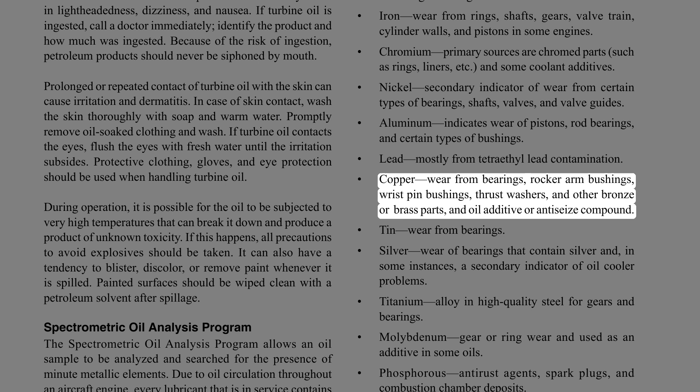Lead, mostly from tetraethyl lead contamination. Copper: wear from bearings, rocker arm bushings, wrist pin bushings, thrust washers, and other bronze or brass parts, and oil additive or anti-seize compound. Tin: wear from bearings.

Silver: wear of bearings that contain silver, and in some instances a secondary indicator of oil cooler problems. Titanium: alloy in high-quality steel for gears and bearings. Molybdenum: gear or ring wear, and used as an additive in some oils. Phosphorus: anti-rust agents, spark plugs, and combustion chamber deposits.

Turbine engine lubrication systems. Both wet and dry sump lubrication systems are used in gas turbine engines. Wet sump engines store the lubricating oil in the engine proper, while dry sump engines utilize an external tank mounted on the engine or somewhere in the aircraft structure near the engine, similar to reciprocating piston engines mentioned earlier.

Turbine engine oil systems can also be classified as a pressure relief system that maintains a somewhat constant pressure, the full flow type of system in which the pressure varies with engine speed, and the total loss system used in engines for short duration operation such as target drones and missiles. The most widely used system is the pressure relief system, with full flow used mostly on large fan-type engines.

One of the main functions of the oil system in turbine engines is cooling the bearings by carrying heat away from the bearing through circulating oil around it. The exhaust turbine bearing is the most critical lubricating point in a gas turbine engine because of the high temperature normally present. In some engines, air cooling is used in addition to oil cooling the bearing which supports the turbine.

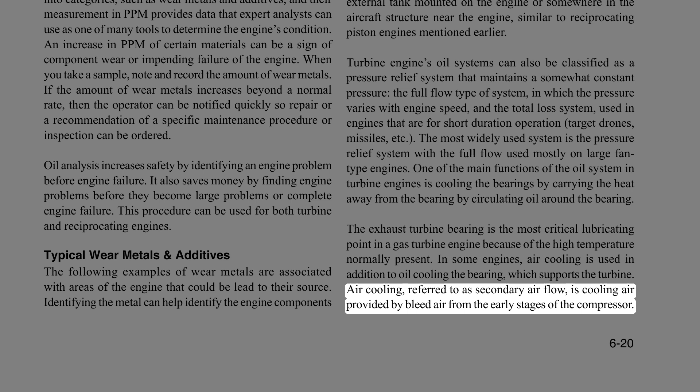Air cooling, referred to as secondary airflow, is cooling air provided by bleed air from the early stages of the compressor. This internal airflow has many uses inside the engine, including cooling the turbine disc, vanes, and blades.

Also, some turbine wheels may have bleed air flowing over the turbine disc, which reduces heat radiation to the bearing surface. Bearing cavities sometimes use compressor air to aid in cooling the turbine bearing. This bleed air is usually taken off a compressor stage at a point where air has enough pressure but has not yet become too warm, since air becomes heated as it is compressed. The use of cooling air substantially reduces the quantity of oil necessary to provide adequate cooling of the bearings.

Since cooling is a major function of the oil in turbine engines, the lubricating oil for bearing cooling normally requires an oil cooler. When an oil cooler is required, usually a greater quantity of oil is necessary to provide for circulation between the cooler and engine. To ensure proper temperature, oil is routed through either air-cooled and/or fuel-cooled oil coolers. This system is also used to heat and regulate the fuel to prevent ice in the fuel.

Turbine lubrication system components. The following component descriptions include most found in the various turbine lubrication systems. However, since engine oil systems vary somewhat according to engine model and manufacturer, not all of these components are necessarily found in any one system.

Oil tank. Although dry-sump systems use an oil tank that contains most of the oil supply, a small sump is usually included on the engine to hold a small supply of oil. It usually contains the oil pump, the scavenge and pressure inlet strainers, scavenge return connection, pressure outlet ports, an oil filter, and mounting bosses for the oil pressure gauge and temperature bulb connections.

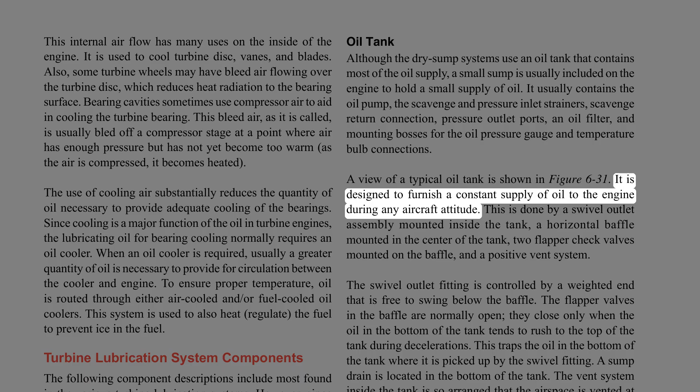A view of a typical oil tank is shown in Figure 6-31. It is designed to furnish a constant supply of oil to the engine during any aircraft attitude. This is done by a swivel outlet assembly mounted inside the tank, a horizontal baffle mounted in the center of the tank, two flapper check valves mounted on the baffle, and a positive vent system.

The swivel outlet fitting is controlled by a weighted end that is free to swing below the baffle. The flapper valves in the baffle are normally open. They close only when the oil in the bottom of the tank tends to rush to the top during decelerations. This traps the oil in the bottom of the tank where it is picked up by the swivel fitting. A sump drain is located in the bottom of the tank.

The vent system inside the tank is arranged so the airspace is vented at all times, even though oil may be forced to the top of the tank by deceleration of the aircraft. All oil tanks are provided with expansion space, allowing expansion of the oil after heat is absorbed from the bearings and gears and after the oil foams as a result of circulating through the system.

Some tanks also incorporate a deaerator tray for separating air from the oil returned to the top of the tank by the scavenger system. Usually these deaerators are the can type in which oil enters at a tangent. The air released is carried out through the vent system in the top of the tank.

In most oil tanks, a pressure buildup is desired within the tank to ensure a positive flow of oil to the oil pump inlet. This pressure buildup is made possible by running the vent line through an adjustable check relief valve, usually set to relieve at about 4 psi, keeping positive pressure on the oil pump inlet.

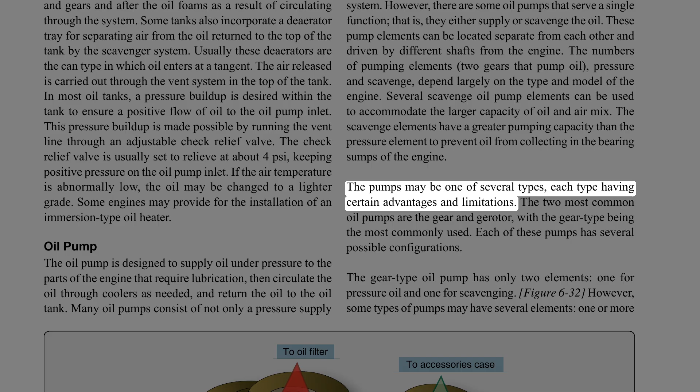The pumps may be one of several types, each having certain advantages and limitations. The two most common oil pumps are the gear and gerotor types, with the gear type being most commonly used. Each of these pumps has several possible configurations.

The gear-type oil pump has only two elements, one for pressure oil and one for scavenging. However, some pumps may have several elements—one or more for pressure and two or more for scavenging. The clearances between the gear teeth and the sides of the pump wall and plate are critical to maintain the correct output of the pump.

A regulating relief valve on the discharge side of the pump limits the output pressure by bypassing oil to the pump inlet when the outlet pressure exceeds a predetermined limit. This regulating valve can be adjusted, if needed, to bring the oil pressure within limits. Also shown is the shaft shear section, which causes the shaft to shear if the pump gears should seize up and not turn.

The gerotor pump, like the gear pump, usually contains a single element for oil pressure and several elements for scavenging oil. Each element, pressure and scavenge, is almost identical in shape; however, capacity can be controlled by varying the size of the gerotor elements. For example, the pressure element may have a pumping capacity of 3.1 gallons per minute (GPM), compared to 4.25 GPM for the scavenge elements. Consequently, the pressure element is smaller, since all elements are driven by a common shaft.

Pressure is determined by engine RPM, with minimum pressure at idling speed and maximum pressure at intermediate and maximum engine speeds. A typical set of gerotor pumping elements is shown in Figure 6-33. Each set of gerotors is separated by a steel plate, making each set an individual pumping unit consisting of an inner and an outer element.

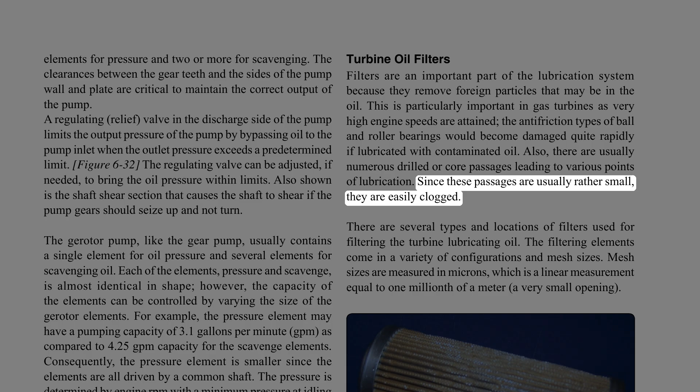In each case, the oil flows as long as the engine shaft is turning. Turbine oil filters are an important part of the lubrication system because they remove foreign particles that may be in the oil. This is particularly important in gas turbines as very high engine speeds are attained. The anti-friction types of ball and roller bearings would become damaged quite rapidly if lubricated with contaminated oil. Also, there are usually numerous drilled or core passages leading to various points of lubrication. Since these passages are usually rather small, they are easily clogged.

There are several types and locations of filters used for filtering the turbine lubricating oil. The filtering elements come in a variety of configurations and mesh sizes. Mesh sizes are measured in microns, which is a linear measurement equal to 1/1,000,000 of a meter, a very small opening. A main oil strainer filter element is shown in Figure 6-34.

The filtering element interior is made of varying materials including paper and metal mesh. Oil normally flows through the filter element from the outside into the filter body. One type of oil filter uses a replaceable laminated paper element, while others use a very fine stainless steel metal mesh of about 25 to 35 microns.

Most filters are located close to the pressure pump and consist of a filter body or housing, filter element, a bypass valve, and a check valve. The filter bypass valve prevents the oil flow from being stopped if the filter element becomes clogged. The bypass valve opens whenever a certain pressure is reached. If this occurs, the filtering action is lost, allowing unfiltered oil to be pumped to the bearings. However, this prevents the bearings from receiving no oil at all.

In the bypass mode, many engines have a mechanical indicator that pops out to indicate the filter is in the bypass mode. This indication is visual and can only be seen by inspecting the engine directly. An anti-drain check valve is incorporated into the assembly to prevent the oil in the tank from draining down into the engine sumps when the engine is not operating. This check valve is normally spring-loaded closed with 4 to 6 psi needed to open it.

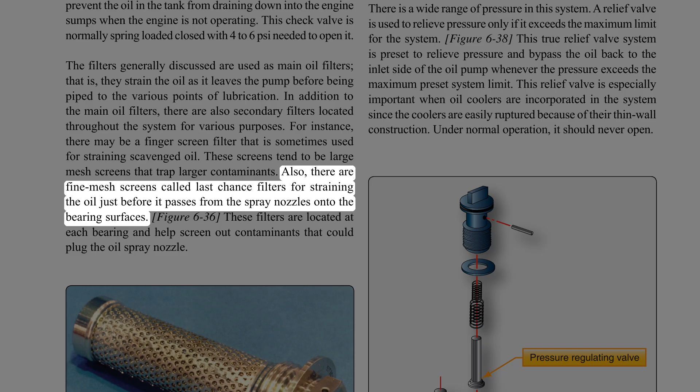For instance, there may be a finger screen filter that is sometimes used for straining scavenged oil. These screens tend to be large mesh screens that trap larger contaminants. Also, there are fine mesh screens called last chance filters for straining the oil just before it passes from the spray nozzles onto the bearing surfaces. These filters are located at each bearing and help screen out contaminants that could plug the oil spray nozzle.

Oil pressure regulating valve. Most turbine engine oil systems are pressure regulating type systems that keep the pressure fairly constant. An oil pressure regulating valve is included in the oil system on the pressure side of the pressure pump. A regulating valve system controls the system's pressure to a limited pressure within the system. It is more of a regulating valve than a relief valve because it keeps the pressure in the system within certain limits other than only opening when the absolute maximum pressure of the system is exceeded.

The regulating valve, Figure 6-37, has a valve held against a seat by a spring. By increasing the tension on the spring, you change the pressure at which the valve opens, and you also increase the system pressure. A screw pressing on the spring adjusts the tension on the valve and the system pressure.

Oil pressure relief valve. Some large turbofan oil systems do not have a regulating valve. The system pressure varies with engine RPM and pump speed. There is a wide range of pressure in this system. A relief valve is used to relieve pressure only if it exceeds the maximum limit for the system. This true relief valve system is preset to relieve pressure and bypass the oil back to the inlet side of the oil pump whenever the pressure exceeds the maximum preset system limit.

This relief valve is especially important when oil coolers are incorporated in the system since the coolers are easily ruptured because of their thin wall construction. Under normal operation, it should never open.

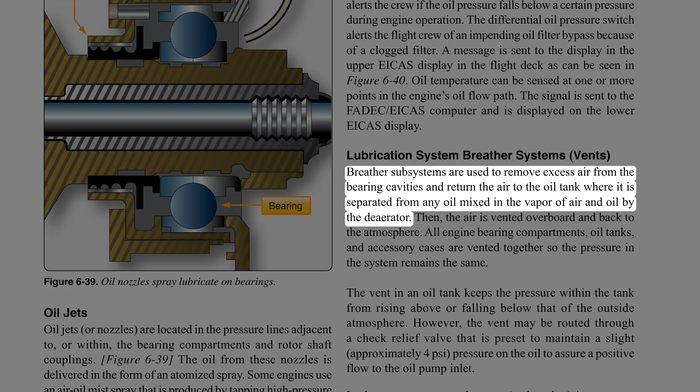Lubrication system breather systems, vents. Breather subsystems are used to remove excess air from the bearing cavities and return the air to the oil tank, where it is separated from any oil mixed in the vapor of air and oil by the deaerator. Then the air is vented overboard and back to the atmosphere.

All engine bearing compartments, oil tanks, and accessory cases are vented together so the pressure in the system remains the same. The vent in an oil tank keeps the pressure within the tank from rising above or falling below that of the outside atmosphere. However, the vent may be routed through a check relief valve that is preset to maintain a slight, approximately 4 psi, pressure on the oil to assure a positive flow to the oil pump inlet.

In the accessory case, the vent, or breather, is a screen-protected opening that allows accumulated air pressure within the accessory case to escape to the atmosphere. The scavenged oil carries air into the accessory case, and this air must be vented; otherwise, the pressure buildup within the accessory case would stop the flow of oil draining from the bearing, forcing this oil past the bearing oil seals and into the compressor housing.

If in enough quantity, oil leakage could cause burning and seal and bearing malfunction. The screened breathers are usually located in the front center of the accessory case to prevent oil leakage through the breather when the aircraft is in unusual flight attitudes. Some breathers may have a baffle to prevent oil leakage during flight maneuvers.

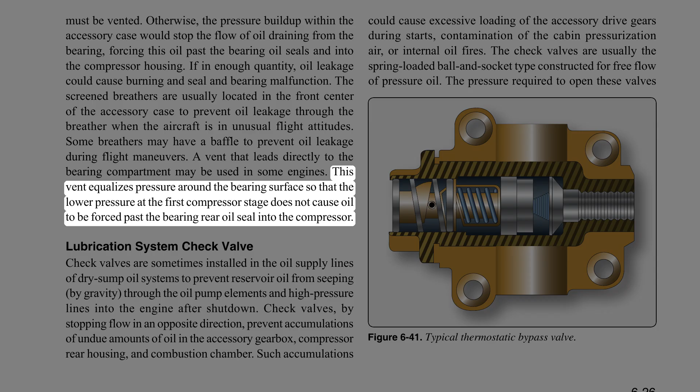A vent that leads directly to the bearing compartment may be used in some engines. This vent equalizes pressure around the bearing surface so that the lower pressure at the first compressor stage does not cause oil to be forced past the bearing rear oil seal into the compressor.

Lubrication system check valve. Check valves are sometimes installed in the oil supply lines of dry-sump oil systems to prevent reservoir oil from seeping, by gravity, through the oil pump elements and high-pressure lines into the engine after shutdown. Check valves, by stopping flow in an opposite direction, prevent accumulations of undue amounts of oil in the accessory gearbox, compressor rear housing, and combustion chamber.

Such accumulations could cause excessive loading of the accessory drive gears during starts, contamination of the cabin pressurization air, or internal oil fires. The check valves are usually the spring-loaded ball and socket type, constructed for free flow of pressure oil. The pressure required to open these valves varies, but generally requires from 2 to 5 psi to permit oil to flow to the bearings.

Lubrication system thermostatic bypass valves.

Thermostatic bypass valves are included in oil systems using an oil cooler. Although these valves may be called different names, their purpose is always to maintain proper oil temperature by varying the proportion of the total oil flow passing through the oil cooler.

A cutaway view of a typical thermostatic bypass valve is shown in Figure 6-41. This valve consists of a valve body, having two inlet ports and one outlet port, and a spring-loaded thermostatic element valve. The valve is spring-loaded because the pressure drop through the oil cooler could become too great due to denting or clogging of the cooler tubing. In such a case, the valve opens, bypassing the oil around the cooler.

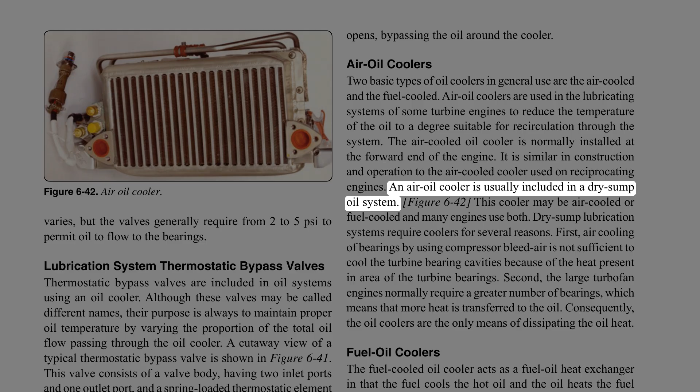An air oil cooler is usually included in a dry-sump oil system. This cooler may be air-cooled or fuel-cooled, and many engines use both. Dry-sump lubrication systems require coolers for several reasons. First, air cooling of bearings using compressor bleed air is not sufficient to cool the turbine bearing cavities because of the heat present in the area of the turbine bearings. Second, large turbofan engines normally require a greater number of bearings, meaning more heat is transferred to the oil. Consequently, the oil coolers are the only means of dissipating the oil heat.

Fuel oil coolers: the fuel-cooled oil cooler acts as a fuel-oil heat exchanger in that the fuel cools the hot oil and the oil heats the fuel for combustion. Fuel flowing to the engine must pass through the heat exchanger. However, there is a thermostatic valve that controls the oil flow, and the oil may bypass the cooler if no cooling is needed. The fuel oil heat exchanger consists of a series of joined tubes with an inlet and outlet port. The oil enters the inlet port, moves around the fuel tubes, and goes out the oil outlet port.

Deoiler: the deoiler removes the oil from the breather air. The breather air goes into an impeller that turns in the deoiler housing. Centrifugal force drives the oil towards the outer wall of the impeller. Then the oil drains from the deoiler into a sump or oil tank. Because the air is much lighter than the oil, it goes through the center of the impeller and is vented overboard.

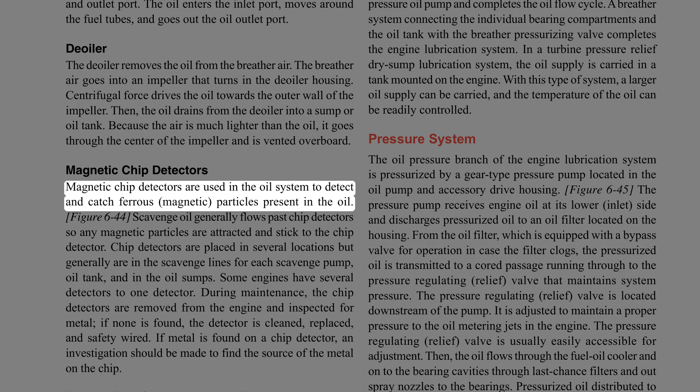Magnetic chip detectors are used in the oil system to detect and catch ferrous, magnetic particles present in the oil. Scavenge oil generally flows past chip detectors, so any magnetic particles are attracted and stick to the chip detector. Chip detectors are placed in several locations but generally are in the scavenge lines for each scavenge pump, oil tank, and in the oil sumps. Some engines have several detectors; others have one detector.

During maintenance, the chip detectors are removed from the engine and inspected for metal. If none is found, the detector is cleaned, replaced, and safety wired. If metal is found on a chip detector, an investigation should be made to find the source of the metal on the chip.

Typical dry-sump pressure-regulated turbine lubrication system: the turbine lubrication system is representative of turbine engines using a dry-sump system. The lubrication system is a pressure-regulated, high-pressure design. It consists of the pressure, scavenge, and breather subsystems. The pressure system supplies oil to the main engine bearings and to the accessory drives. The scavenge system returns the oil to the engine oil tank, usually mounted on the compressor case. It is connected to the inlet side of the pressure oil pump and completes the oil flow cycle. A breather system connecting the individual bearing compartments and the oil tank with the breather pressurizing valve completes the engine lubrication system.

In a turbine pressure relief dry sump lubrication system, the oil supply is carried in a tank mounted on the engine. With this type of system, a larger oil supply can be carried, and the temperature of the oil can be readily controlled.

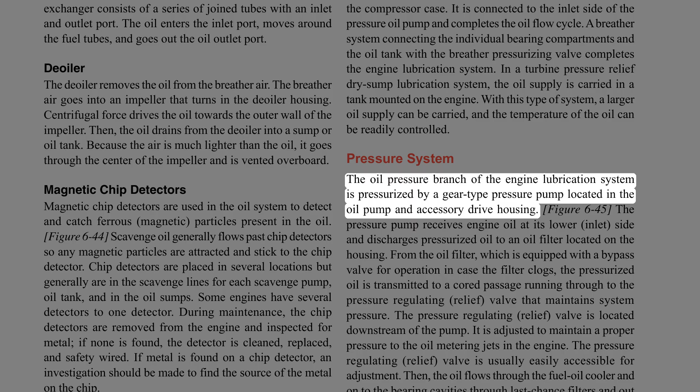Pressure system: the oil pressure branch of the engine lubrication system is pressurized by a gear-type pressure pump located in the oil pump and accessory drive housing. The pressure pump receives engine oil at its lower inlet side and discharges pressurized oil to an oil filter located on the housing.

From the oil filter, which is equipped with a bypass valve for operation in case the filter clogs, the pressurized oil is transmitted to a cored passage running through to the pressure regulating relief valve that maintains system pressure. This valve is located downstream of the pump and is adjusted to maintain proper pressure to the oil metering jets in the engine. It is usually easily accessible for adjustment.

Then, the oil flows through the fuel oil cooler and onto the bearing cavities through last chance filters and out spray nozzles to the bearings. Pressurized oil distributed to the engine main bearings is sprayed on the bearings through fixed orifice nozzles, providing a relatively constant oil flow at all engine operating speeds.

Scavenge system. The scavenge system scavenges the main bearing compartments and circulates the scavenged oil back to the tank. The Scavenge Oil System includes 5 gear-type pumps. The number 1 bearing oil scavenge pump scavenges accumulated oil from the front bearing case, directing it through an external line to a central collecting point in the main accessory gearbox.

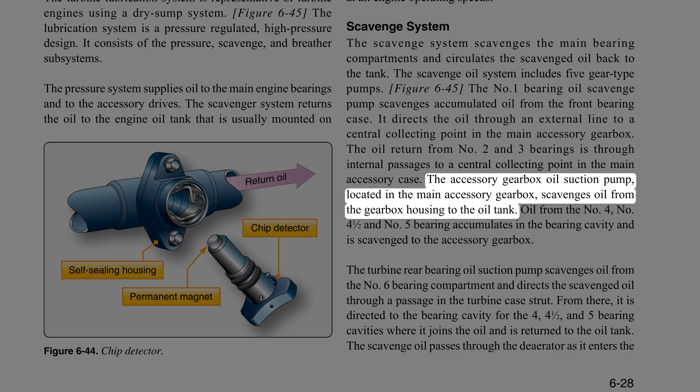The oil return from No. 2 and 3 bearings is through internal passages to a central collecting point in the main accessory case. The accessory gearbox oil suction pump, located in the main accessory gearbox, scavenges oil from the gearbox housing to the oil tank. Oil from the number 4, 4.5, and No. 5 bearing accumulates in the bearing cavity and is scavenged to the accessory gearbox.

The turbine rear bearing oil suction pump scavenges oil from the number 6 bearing compartment and directs the scavenged oil through a passage in the turbine case strut. From there, it is directed to the bearing cavity for the 4, 4.5, and 5 bearing cavities where it joins the oil and is returned to the oil tank.

The scavenge oil passes through the deaerator as it enters the oil tank, which separates the air mixed in the return oil. The oil stays in the tank while the air flows into the accessory gearbox and enters the Deoiler.

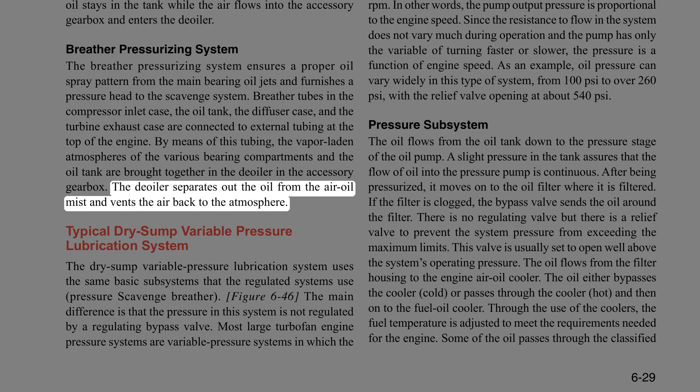Breather Pressurizing System. The breather pressurizing system ensures a proper oil spray pattern from the main bearing oil jets and furnishes a pressure head to the scavenge system. Breather tubes in the compressor inlet case, the oil tank, the diffuser case, and the turbine exhaust case are connected to external tubing at the top of the engine. By means of this tubing, the vapor-laden atmospheres of the various bearing compartments and the oil tank are brought together in the Deoiler in the accessory gearbox. The Deoiler separates out the oil from the air oil mist and vents the air back to the atmosphere.

Typical Dry-Sump variable pressure lubrication system. The Dry-Sump variable pressure lubrication system uses the same basic subsystems that the regulated systems use: pressure, scavenge, breather. The main difference is that the pressure in this system is not regulated by a regulating bypass valve.

Most large turbofan engine pressure systems are variable pressure systems in which the pump outlet pressure, oil pressure, depends on the engine RPM. In other words, the pump output pressure is proportional to the engine speed. Since the resistance to flow in the system does not vary much during operation and the pump has only the variable of turning faster or slower, the pressure is a function of engine speed.

As an example, oil pressure can vary widely in this type of system, from 100 psi to over 260 psi, with the relief valve opening at about 540 psi.

Pressure subsystem. The oil flows from the oil tank down to the pressure stage of the oil pump. A slight pressure in the tank assures that the flow of oil into the pressure pump is continuous. After being pressurized, it moves on to the oil filter where it is filtered. If the filter is clogged, the bypass valve sends the oil around the filter.

There is no regulating valve, but there is a relief valve to prevent the system pressure from exceeding the maximum limits. This valve is usually set to open well above the system's operating pressure.

The oil flows from the filter housing to the engine air oil cooler. The oil either bypasses the cooler, cold, or passes through the cooler, hot, and then on to the fuel oil cooler. Through the use of the coolers, the fuel temperature is adjusted to meet the requirements needed for the engine. Some of the oil passes through the classified oil pressure trim orifice that helps adjust oil pressure at low speeds. The oil now flows through the last chance oil filters, strainers, that remove particles from the oil if the oil filter has been bypassed.

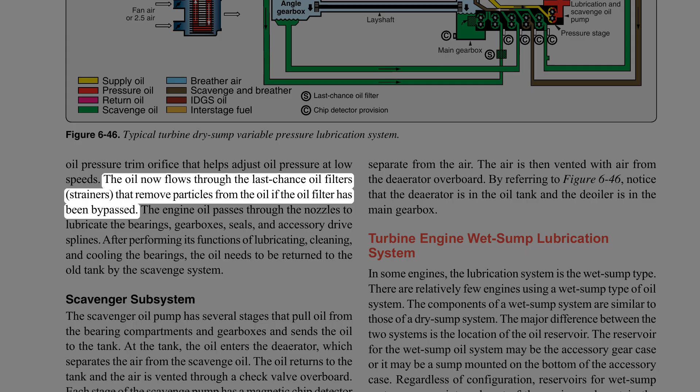The engine oil passes through the nozzles to lubricate the bearings, gearboxes, seals, and accessory drive splines. After performing its functions of lubricating, cleaning, and cooling the bearings, the oil needs to be returned to the tank by the Scavenge System.

Scavenger Subsystem. The Scavenger oil pump has several stages that pull oil from the bearing compartments and gearboxes and sends the oil to the tank.

At the tank, the oil enters the deaerator, which separates the air from the scavenge oil. The oil returns to the tank and the air is vented through a check valve overboard. Each stage of the scavenge pump has a magnetic chip detector that can be removed for inspection.

Breather Subsystem. The purpose of the breather system is to remove air from the bearing compartments, separate breather air from oil, and vent the air overboard.

The breather air from the bearing compartments is drawn to the gearbox by the Deoiler. The Deoiler is turned at high speed and causes the oil to separate from the air. The air is then vented with air from the deaerator overboard.

By referring to figure 6-46, notice that the deaerator is in the oil tank and the Deoiler is in the main gearbox. Turbine engine Wet-Sump lubrication system.

In some engines, the lubrication system is the Wet-Sump type. There are relatively few engines using a Wet-Sump type of oil system. The components of a Wet-Sump system are similar to those of a Dry-Sump system. The major difference between the two systems is the location of the oil reservoir.

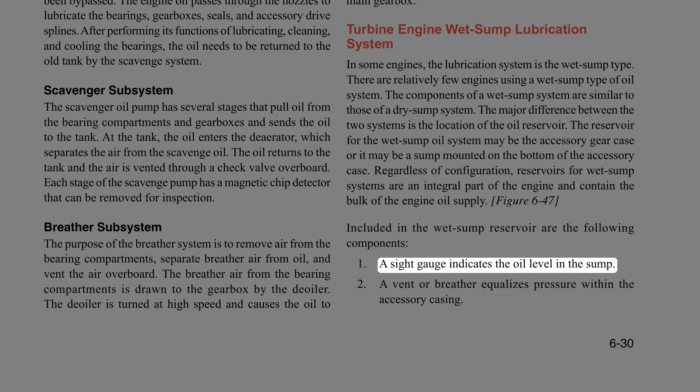A sight gauge indicates the oil level in the sump. A vent or breather equalizes pressure within the accessory casing.

A magnetic drain plug may be provided to drain the oil and also to trap any ferrous metal particles in the oil. This plug should always be examined closely during inspections. The presence of metal particles may indicate gear or bearing failure.

Provision may also be made for a temperature bulb and an oil pressure fitting. This system is typical of all engines using a Wet-Sump lubrication system. The bearing and drive gears in the accessory drive casing are lubricated by a splash system.

The oil for the remaining points of lubrication leaves the pump under pressure and passes through a filter to jet nozzles that direct the oil into the rotor bearings and couplings. The oil is returned to the reservoir, sump, by gravity.

Oil from the compressor bearing and the accessory's drive coupling shaft drains directly into the reservoir. Turbine oil drains into a sump where the oil was originally pumped. Turbine engine oil system maintenance.

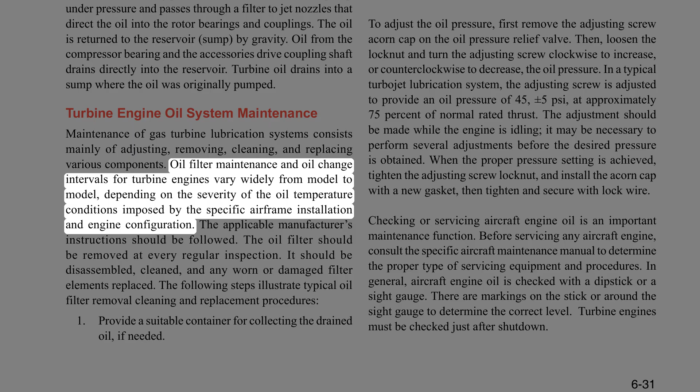Maintenance of gas turbine lubrication systems consists mainly of adjusting, removing, cleaning, and replacing various components. Oil filter maintenance and oil change intervals for turbine engines vary widely from model to model, depending on the severity of the oil temperature conditions imposed by the specific airframe installation and engine configuration. The applicable manufacturer's instructions should be followed.

The oil filter should be removed at every regular inspection. It should be disassembled, cleaned, and any worn or damaged filter elements replaced. The following steps illustrate typical oil filter removal cleaning and replacement procedures.

Provide a suitable container for collecting the drained oil, if needed. Remove the filter housing and withdraw the filter assembly. Discard the old seals. Immerse the screen or filter in an approved carbon remover at room temperature for a few minutes.

Rinse them in a degreaser fluid or cleaning solvent. Then blow them dry with an air jet. Then install the filter in the filter housing assembly. Place a new seal and tighten it to the torque prescribed in the manufacturer's instructions.

Secure with lock wire. To adjust the oil pressure, first remove the adjusting screw acorn cap on the oil pressure relief valve. Then loosen the lock nut and turn the adjusting screw clockwise to increase, or counterclockwise to decrease, the oil pressure. In a typical turbojet lubrication system, the adjusting screw is adjusted to provide an oil pressure of 45, plus or minus 5 psi, at approximately 75% of normal rated thrust.

The adjustment should be made while the engine is idling. It may be necessary to perform several adjustments before the desired pressure is obtained.

When the proper pressure setting is achieved, tighten the adjusting screw lock nut, and install the acorn cap with a new gasket, then tighten and secure with lock wire.

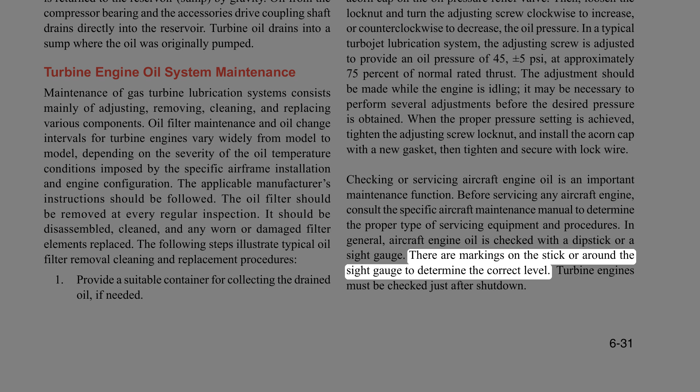Turbine engines must be checked just after shutdown. Maintenance of scavenge and breather systems at regular inspections includes checks for oil leaks and security of mounting of system components. Also, check chip detectors for particles of ferrous material and clean last chance filters, install and safety.

Engine cooling systems. Excessive heat is always undesirable in both reciprocating and turbine aircraft engines. If means were not available for its control or elimination, major damage or complete engine failure would occur. Although the vast majority of reciprocating engines are air-cooled, some diesel liquid-cooled engines are being made available for light aircraft. In a liquid-cooled engine, around the cylinder are water jackets, in which liquid coolant is circulated and the coolant takes away the excess heat. The excess heat is then dissipated by a heat exchanger or radiator using airflow.

Turbine engines use secondary airflow to cool the inside components and many of the exterior components.

Reciprocating engine cooling systems. An internal combustion engine is a heat machine that converts chemical energy in the fuel into mechanical energy at the crankshaft. It does not do this without some loss of energy, however, and even the most efficient aircraft engines may waste 60 to 70% of the original energy in the fuel. Unless most of this waste heat is rapidly removed, the cylinders may become hot enough to cause complete engine failure.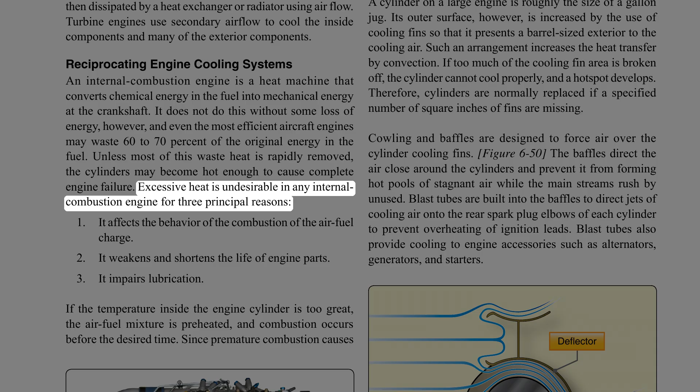Excessive heat is undesirable in any internal combustion engine for three principal reasons. It affects the behavior of the combustion of the air-fuel charge. It weakens and shortens the life of engine parts. It impairs lubrication. If the temperature inside the engine cylinder is too great, the air-fuel mixture is preheated, and combustion occurs before the desired time. Since premature combustion causes detonation, knocking, and other undesirable conditions, there must be a way to eliminate heat before it causes damage.

1 gallon of aviation gasoline has enough heat value to boil 75 gallons of water. Thus, it is easy to see that an engine that burns 4 gallons of fuel per minute releases a tremendous amount of heat. About 1/4 of the heat released is changed into useful power. The remainder of the heat must be dissipated so that it is not destructive to the engine.

In a typical aircraft power plant, half of the heat goes out with the exhaust and the other is absorbed by the engine. Circulating oil picks up part of this soaked-in heat and transfers it to the airstream through the oil cooler. The engine cooling system takes care of the rest.

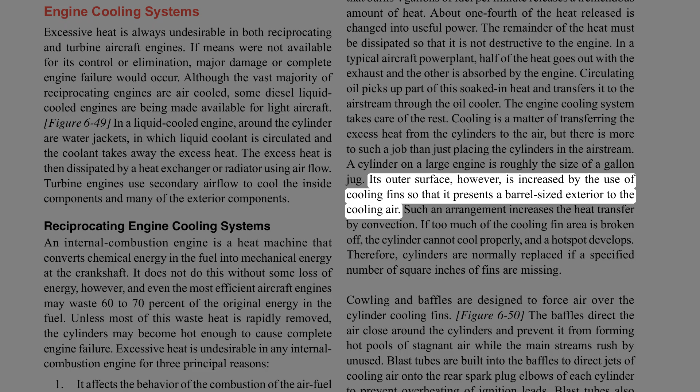Cooling is a matter of transferring the excess heat from the cylinders to the air, but there is more to such a job than just placing the cylinders in the airstream. A cylinder on a large engine is roughly the size of a gallon jug. Its outer surface, however, is increased by the use of cooling fins so that it presents a barrel-sized exterior to the cooling air. Such an arrangement increases the heat transfer by convection.

If too much of the cooling fin area is broken off, the cylinder cannot cool properly, and a hotspot develops. Therefore, cylinders are normally replaced if a specified number of square inches of fins are missing.

Cowling and baffles are designed to force air over the cylinder cooling fins. The baffles direct the air close around the cylinders and prevent it from forming hot pools of stagnant air while the main streams rush by unused.

Blast tubes are built into the baffles to direct jets of cooling air onto the rear spark plug elbows of each cylinder to prevent overheating of ignition leads. Blast tubes also provide cooling to engine accessories such as alternators, generators, and starters.

An engine can have an operating temperature that is too low. For the same reasons that an engine is warmed up before takeoff, it is kept warm during flight. Fuel evaporation and distribution and oil circulation depend on an engine being kept at its optimum operating temperature.

The aircraft engine has temperature controls that regulate air circulation over the engine. Unless some controls are provided, the engine could overheat on takeoff and get too cold in high altitude, high speed and low power letdowns.

The most common means of controlling cooling is the use of cowl flaps. These flaps are opened and closed by electric motor-driven jack screws, by hydraulic actuators, or manually in some light aircraft. When extended for increased cooling, the cowl flaps produce drag and sacrifice streamlining for the added cooling. On takeoff, the cowl flaps are opened only enough to keep the engine below the red line temperature.

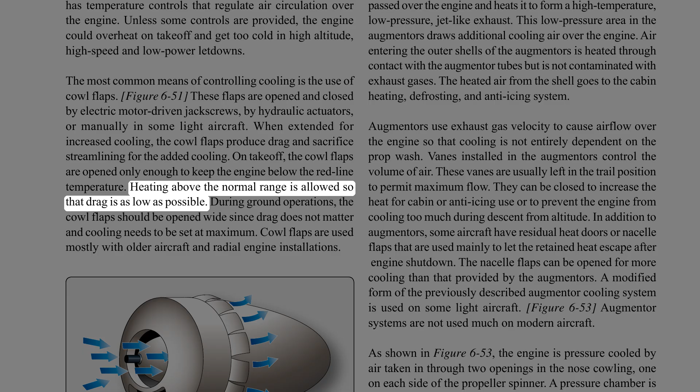Heating above the normal range is allowed so that drag is as low as possible. During ground operations, the cowl flaps should be opened wide since drag does not matter and cooling needs to be set at maximum. Cowl flaps are used mostly with older aircraft and radial engine installations.

Some aircraft use augmentors to provide additional cooling airflow. Each nacelle has 2 pairs of tubes running from the engine compartment to the rear of the nacelle. The exhaust collectors feed exhaust gas into the inner augmentor tubes. The exhaust gas mixes with air that has passed over the engine and heats it to form a high temperature, low pressure, jet-like exhaust. This low pressure area in the augmentors draws additional cooling air over the engine.

Air entering the outer shells of the augmentors is heated through contact with the augmentor tubes but is not contaminated with exhaust gases. The heated air from the shell goes to the cabin heating, defrosting, and anti-icing system.

Augmentors use exhaust gas velocity to cause airflow over the engine so that cooling is not entirely dependent on the prop wash. Vanes installed in the augmentors control the volume of air. These vanes are usually left in the trail position to permit maximum flow. They can be closed to increase the heat for cabin or anti-icing use or to prevent the engine from cooling too much during descent from altitude.

In addition to augmentors, some aircraft have residual heat doors or nacelle flaps that are used mainly to let the retained heat escape after engine shutdown. The nacelle flaps can be opened for more cooling than that provided by the augmentors. A modified form of the previously described augmentor cooling system is used on some light aircraft. Augmentor systems are not used much on modern aircraft.

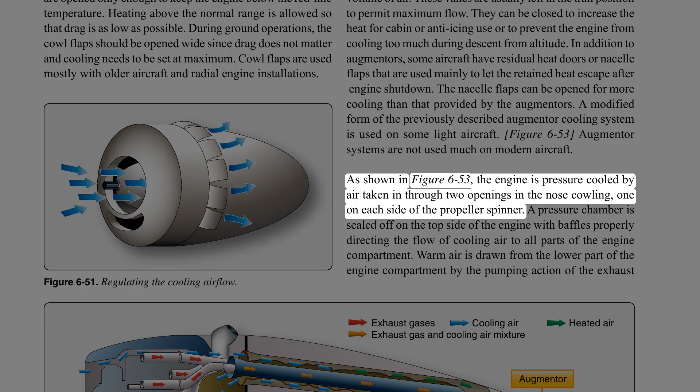As shown in Figure 6-53, the engine is pressure-cooled by air taken in through two openings in the nose cowling, one on each side of the propeller spinner. A pressure chamber is sealed off on the top side of the engine with baffles properly directing the flow of cooling air to all parts of the engine compartment.

Warm air is drawn from the lower part of the engine compartment by the pumping action of the exhaust gases through the exhaust ejectors. This type of cooling system eliminates the use of controllable cowl flaps and assures adequate engine cooling at all operating speeds.

Reciprocating engine cooling system maintenance. The engine cooling system of most reciprocating engines usually consists of the engine cowling, cylinder baffles, cylinder fins, and some use a type of cowl flaps. In addition to these major units, there are also some temperature indicating systems, such as cylinder head temperature, oil temperature, and exhaust gas temperature.

The cowling performs two functions. It streamlines the bulky engine to reduce drag. It forms an envelope around the engine that forces air to pass around and between the cylinders, absorbing the heat dissipated by the cylinder fins.

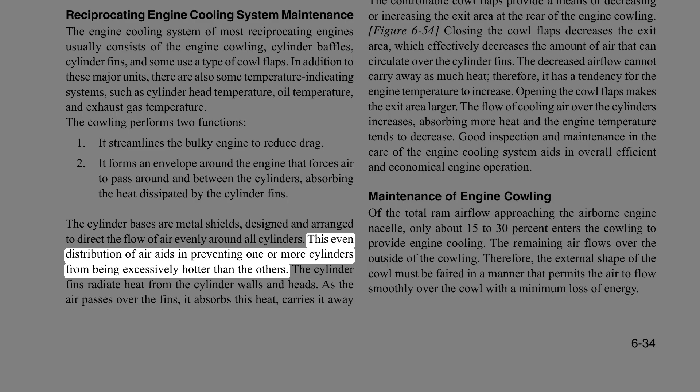The cylinder baffles are metal shields, designed and arranged to direct the flow of air evenly around all cylinders. This even distribution of air aids in preventing one or more cylinders from being excessively hotter than the others. The cylinder fins radiate heat from the cylinder walls and heads. As the air passes over the fins, it absorbs this heat, carries it away from the cylinder, and is exhausted overboard through the bottom rear of the cowl.

The controllable cowl flaps provide a means of decreasing or increasing the exit area at the rear of the engine cowling. Closing the cowl flaps decreases the exit area, which effectively decreases the amount of air that can circulate over the cylinder fins. The decreased airflow cannot carry away as much heat, therefore, it has a tendency for the engine temperature to increase. Opening the cowl flaps makes the exit area larger. The flow of cooling air over the cylinders increases, absorbing more heat, and the engine temperature tends to decrease.

Good inspection and maintenance in the care of the engine cooling system aids in overall efficient and economical engine operation. Maintenance of engine cowling: of the total ram airflow approaching the airborne engine nacelle, only about 15 to 30% enters the cowling to provide engine cooling. The remaining air flows over the outside of the cowling.

Therefore, the external shape of the cowl must be faired in a manner that permits the air to flow smoothly over the cowl with a minimum loss of energy.

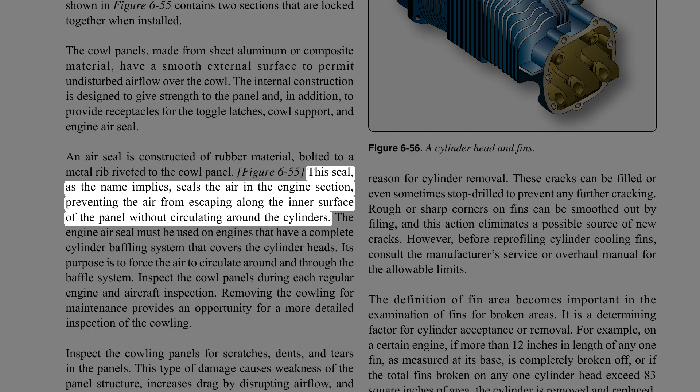An air seal is constructed of rubber material, bolted to a metal rib riveted to the cowl panel. This seal, as the name implies, seals the air in the engine section, preventing the air from escaping along the inner surface of the panel without circulating around the cylinders. The engine air seal must be used on engines that have a complete cylinder baffling system that covers the cylinder heads. Its purpose is to force the air to circulate around and through the baffle system.

Inspect the cowl panels during each regular engine and aircraft inspection. Removing the cowling for maintenance provides an opportunity for a more detailed inspection of the cowling. Inspect the cowling panels for scratches, dents, and tears. This type of damage causes weakness of the panel structure, increases drag by disrupting airflow, and contributes to the starting of corrosion.

The cowling panel latches should be inspected for pulled rivets and loose or damaged handles. The internal construction of the panel should be examined to see that the reinforcing ribs are not cracked and that the air seal is not damaged. The cowl flap hinges, if equipped, and cowl flap hinge bondings should be checked for security of mounting and for breaks or cracks. These inspections are visual checks and should be performed frequently to ensure that the cowling is serviceable and is contributing to efficient engine cooling.

Engine cylinder cooling fin inspection. The cooling fins are of the utmost importance to the cooling system, since they provide a means of transferring the cylinder heat to the air. Their condition can mean the difference between adequate or inadequate cylinder cooling.

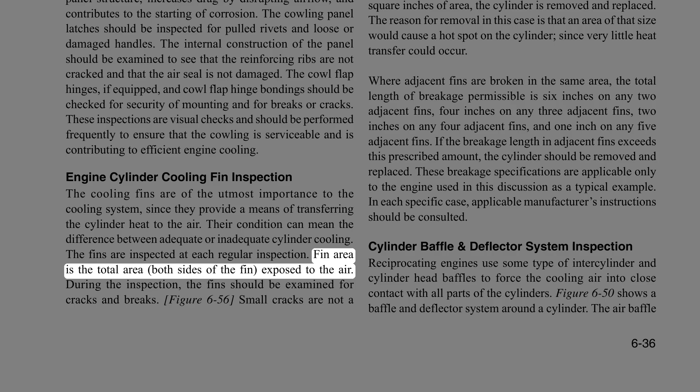The fins are inspected at each regular inspection. Fin area is the total area, both sides of the fin, exposed to the air. During the inspection, the fins should be examined for cracks and breaks. Small cracks are not a reason for cylinder removal; these cracks can be filled or even sometimes stop drilled to prevent any further cracking. Rough or sharp corners on fins can be smoothed out by filing, and this action eliminates a possible source of new cracks. However, before reprofiling cylinder cooling fins, consult the manufacturer's service or overhaul manual for the allowable limits.

The definition of fin area becomes important in the examination of fins for broken areas; it is a determining factor for cylinder acceptance or removal. For example, on a certain engine, if more than 12 inches in length of any one fin, as measured at its base, is completely broken off, or if the total fins broken on any one cylinder head exceed 83 square inches of area, the cylinder is removed and replaced. The reason for removal in this case is that an area of that size would cause a hot spot on the cylinder, since very little heat transfer could occur.

Where adjacent fins are broken in the same area, the total length of breakage permissible is 6 inches on any 2 adjacent fins, 4 inches on any 3 adjacent fins, 2 inches on any 4 adjacent fins, and 1 inch on any 5 adjacent fins. If the breakage length in adjacent fins exceeds this prescribed amount, the cylinder should be removed and replaced. These breakage specifications are applicable only to the engine used in this discussion as a typical example. In each specific case, applicable manufacturer's instructions should be consulted.

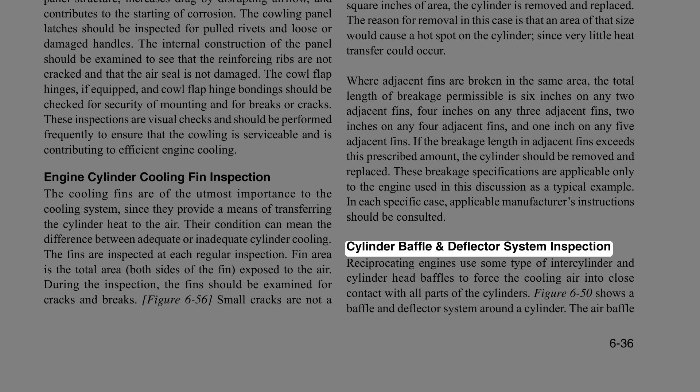Cylinder baffle and deflector system inspection. Reciprocating engines use some type of intercylinder and cylinder head baffles to force the cooling air into close contact with all parts of the cylinders. Figure 6-50 shows a baffle and deflector system around a cylinder. The air baffle blocks the flow of air and forces it to circulate between the cylinder and the deflectors. Figure 6-57 illustrates a baffle and deflector arrangement designed to cool the cylinder head.

The air baffle prevents the air from passing away from the cylinder head and forces it to go between the head and deflector. Although the resistance offered by baffles to the passage of cooling air demands that an appreciable pressure differential be maintained across the engine to obtain the necessary airflow, the volume of cooling air required is greatly reduced by employing properly designed and located cylinder deflectors.

As shown in Figure 6-55, the airflow approaches the nacelle and piles up at the top of the engine, creating a high pressure in the top of the cylinders. This piling up of the air reduces the air velocity. The outlet at the bottom rear of the cowling produces a low pressure area. As the air nears the cowl exit, it is speeded up again and merges smoothly with the airstream. The pressure differential between the top and bottom of the engine forces the air past the cylinders through the passages formed by the deflectors.

The baffles and deflectors normally are inspected during the regular engine inspection, but they should be checked whenever the cowling is removed for any purpose. Checks should be made for cracks, dents, or loose hold-down studs. Cracks or dents, if severe enough, would necessitate repair or removal and replacement of these units. However, a crack that has just started can be stop drilled, and dents can be straightened, permitting further service from these baffles and deflectors.

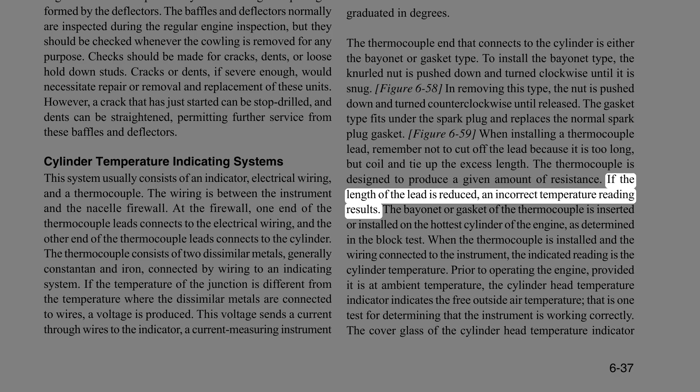The thermocouple is designed to produce a given amount of resistance. If the length of the lead is reduced, an incorrect temperature reading results. The bayonet or gasket of the thermocouple is inserted or installed on the hottest cylinder of the engine, as determined in the block test. When the thermocouple is installed and the wiring connected to the instrument, the indicated reading is the cylinder temperature. Prior to operating the engine, provided it is at ambient temperature, the cylinder head temperature indicator indicates the free outside air temperature. That is one test for determining that the instrument is working correctly.

The cover glass of the cylinder head temperature indicator should be checked regularly to see that it has not slipped or cracked. The cover glass should be checked for indications of missing or damaged decals that indicate temperature limitations. If the thermocouple leads were excessive in length and had to be coiled and tied down, the tie should be inspected for security or chafing of the wire. The bayonet or gasket should be inspected for cleanliness and security of mounting. When operating the engine, all of the electrical connections should be checked if the cylinder head temperature pointer fluctuates.

Exhaust gas temperature indicating systems. The exhaust gas temperature indicator consists of a thermocouple placed in the exhaust stream just after the cylinder port. It is then connected to the instrument in the instrument panel. This allows for the adjustment of the mixture, which has a large effect on engine temperature. By using this instrument to set the mixture, the engine temperature can be controlled and monitored.

Turbine engine cooling. The intense heat generated when fuel and air are burned necessitates that some means of cooling be provided for all internal combustion engines. Reciprocating engines are cooled either by passing air over fins attached to the cylinders or by passing a liquid coolant through jackets that surround the cylinders. The cooling problem is made easier because combustion occurs only during every fourth stroke of a 4-stroke cycle engine.

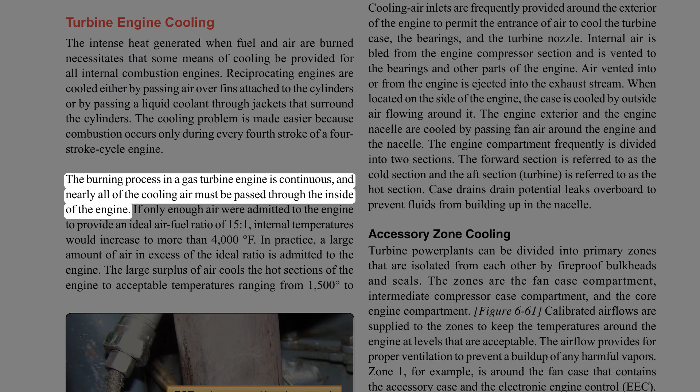The burning process in a gas turbine engine is continuous, and nearly all of the cooling air must be passed through the inside of the engine. If only enough air were admitted to provide an ideal air-fuel ratio of 15:1, internal temperatures would increase to more than 4,000 degrees Fahrenheit.

In practice, a large amount of air in excess of the ideal ratio is admitted to the engine. This surplus of air cools the hot sections of the engine to acceptable temperatures ranging from 1,500 to 2,100 degrees Fahrenheit. Because of this cooling effect, the temperatures on the outside of the case are considerably less than those encountered within the engine.

The hottest area occurs in and around the turbines. Although the gases have begun to cool a little at this point, the conductivity of the metal in the case carries the heat directly to the outside skin.

The secondary air passing through the engine cools the combustion chamber liners. The liners are constructed to induce a thin, fast-moving film of air over both the inner and outer surfaces of the liner. Can-annular-type burners frequently are provided with a center tube to lead cooling air into the center of the burner, promoting high combustion efficiency and rapid dilution of the hot combustion gases while minimizing pressure losses.

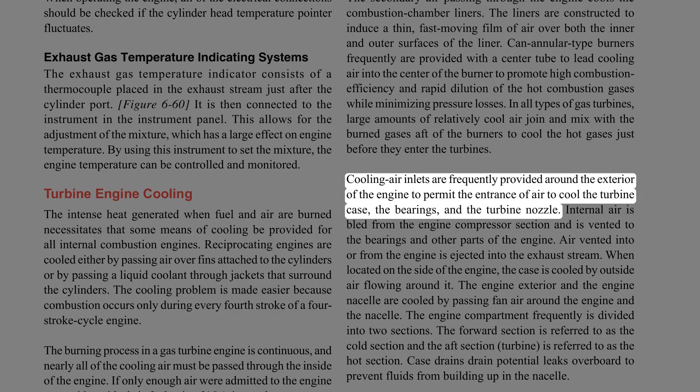In all types of gas turbines, large amounts of relatively cool air join and mix with the burned gases aft of the burners to cool the hot gases just before they enter the turbines. Cooling air inlets are frequently provided around the exterior of the engine to permit the entrance of air to cool the turbine case, the bearings, and the turbine nozzle.

Internal air is bled from the engine compressor section and vented to the bearings and other parts of the engine. Air vented into or from the engine is ejected into the exhaust stream. When located on the side of the engine, the case is cooled by outside air flowing around it. The engine exterior and nacelle are cooled by passing fan air around the engine and the nacelle.

The engine compartment is frequently divided into two sections. The forward section is referred to as the cold section, and the aft section, the turbine, is referred to as the hot section. Case drains drain potential leaks overboard to prevent fluids from building up in the nacelle.

Accessory zone cooling: turbine power plants can be divided into primary zones that are isolated from each other by fireproof bulkheads and seals. The zones are the fan case compartment, the intermediate compressor case compartment, and the core engine compartment. Calibrated airflows are supplied to the zones to keep temperatures around the engine at acceptable levels, and the airflow provides proper ventilation to prevent a buildup of any harmful vapors.

Zone 1, for example, is around the fan case that contains the accessory case and the electronic engine control, EEC. This area is vented using ram air through an inlet in the nose cowl and is exhausted through a louvered vent in the right fan cowling. If the pressure exceeds a certain limit, a pressure relief door opens and relieves the pressure.

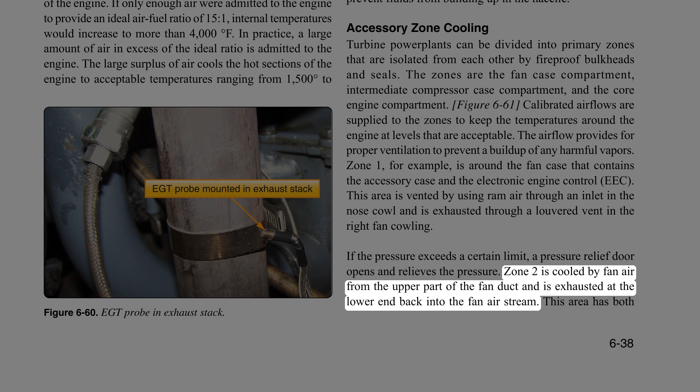Zone 2 is cooled by fan air from the upper part of the fan duct and is exhausted at the lower end back into the fan airstream. This area has both fuel and oil lines, so removing any unwanted vapors would be important.

Zone 3 is the area around the high-pressure compressor to the turbine cases. This zone also contains fuel and oil lines and other accessories. Air enters from the exhaust of the pre-cooler and other areas and is exhausted from the zone through the aft edge of the thrust reverser inner wall and the turbine exhaust sleeve.

This blanket contains fiberglass as the low conductance material and aluminum foil as the radiation shield. The blanket is suitably covered so that it does not become oil-soaked. Insulation blankets have been used rather extensively on many installations where long exhaust is needed. Some auxiliary power units (APU) mounted in the tail cone of transport aircraft have air surrounding the exhaust tailpipe that provides cooling and protects the surrounding structure.